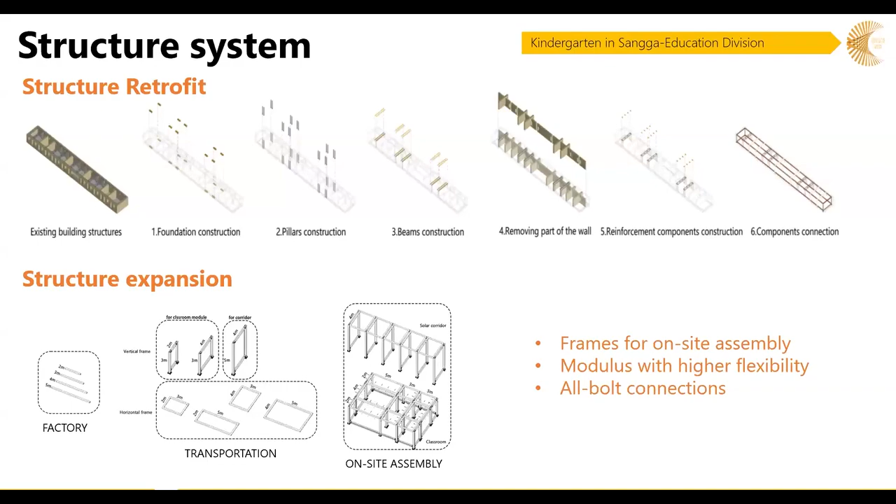For the reinforcement. Innovation is the theme of our new systems, considering the safety, efficiency, and upgrading demand of prefabricated parts.

Sorry, what is happening?

Okay, we decided to standardize prefabrication with both horizontal and vertical frames, with bolt connections placed linearly along the frames for less tolerance concern, higher construction speed, and upgrading support in the future.

The sewage treatment system is innovative based on the local conditions of Tibet. The system utilized a multi-layer biofilter due to the low air pressure in the Tibet Plateau. The artificial wetlands select local vegetation with higher capacity of sewage treatment.

HVAC system, lightings, and plugs are selected based on the principle of efficiency and economy, which is expected to have less load for the building. Here we featured an economical combination of air source heat pump, underfloor heating, radiator, and fresh air machines for the HVAC system, LED lightings for both interior and exterior space, and efficient plug machines.

Our envelope design is based on the existing condition. After site visit and simulation, we identified 5 key issues. The R value of the existing envelope is not even reaching the standard. Considering the problems we identified, our goals for the envelope can be elaborated into 4 points: renovation based on the existing building, use local materials, ensure the high performance of the envelope, and the envelope for a higher durability. Resiliency of the envelope is our primary concern.

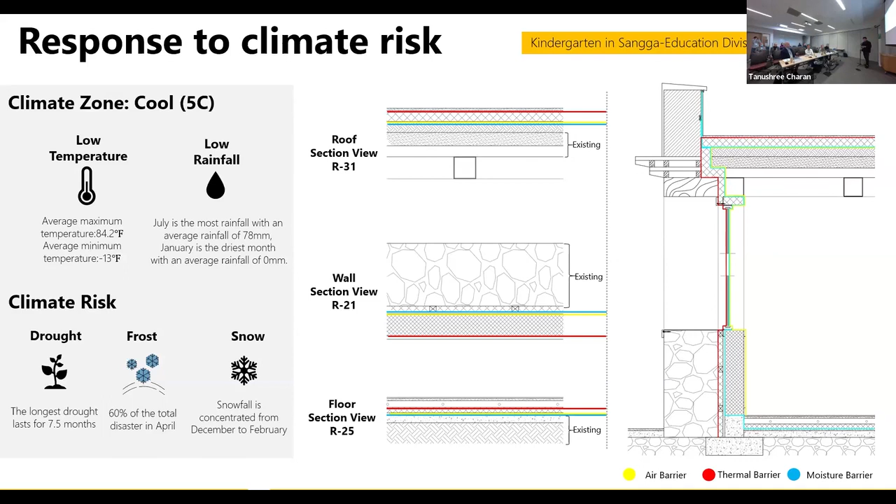Sangga is in climate zone 5C with the climate risks of drought, frost, and snow. Based on the existing envelope, we arranged air, thermal, and moisture barriers to ensure the envelope resists vapor, air leakage, and low temperature. In terms of material, the project proposes a hybrid utilization of straw as decoration board and insulation. This insulation can be both permanent and temporary on site.

Permanent straw insulation board can upgrade the insulation to R value of 21. For the temporary ones, we propose seasonal edible insulation bricks, which can become insulation in winter and feed livestock in summer.

Other than improving the existing envelope, the solar corridor is also important for the overall passive design of the building. For the envelope of the corridor, we proposed quadruple glazing glass. It's actually 2 pieces of glass plus 2 high-performance heat shielding films, which tremendously transform the thermal performance of the building.

Passive and active technologies both have much concern with the efficiency of the building. In this project, our design is conducted in a sequence so that the HVAC system will not overwhelmingly perform. We firstly prioritize the optimization of passive technologies for less energy loss. Then we have the HVAC system to compensate the energy loss and achieve comfort. And finally, the solar system to offset the energy consumption.

When we have the envelope system involved, the energy loss from the building is minimized. The EUI is lowered to 85.74 according to our calculations. We definitely want to use an HVAC system with technically the highest efficiency. However, in real perspective, the economic situation and resource availability always pose a handicap to design decisions.

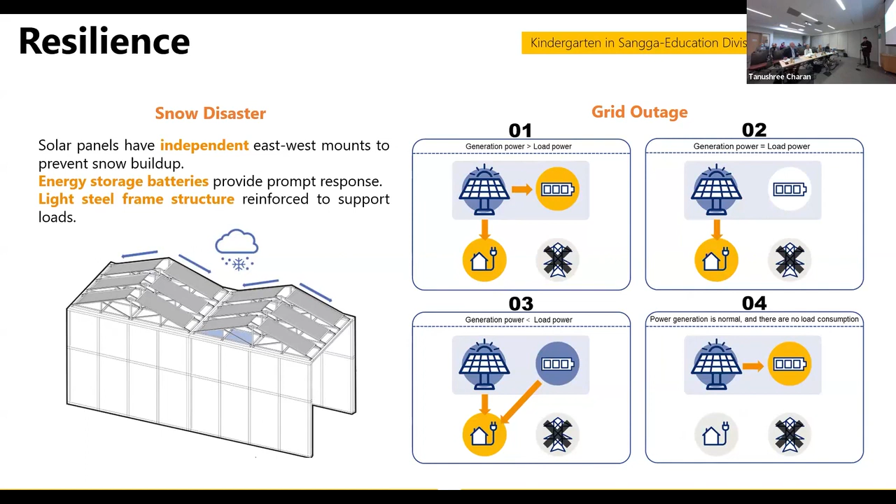To make sure the PV panels are safely and softly interacting with the load, the grid, and the batteries, we also developed a logic for the management of charging and discharging. Other than the use of clean energy, which has less carbon emission, a couple of design decisions we mentioned before all contribute to the reduction of carbon emissions.

After the calculation, we reached the result that embodied carbon emission has been lowered to 391, which has reached level A for the assessment. We consider the reduction of carbon through PV-generated electricity. We expect that in 7 years, the project is able to achieve carbon neutrality. We can say that we reduce carbon emissions to strive for the well-being of the environment.

But what are we doing for the well-being of occupants and community? Our comfort measures include the use of high-performance shielding films for light control, as well as the material selected for improved acoustic environments. Safety of water contributes to another health concern. The consideration for safety is in both the water supply and drainage.

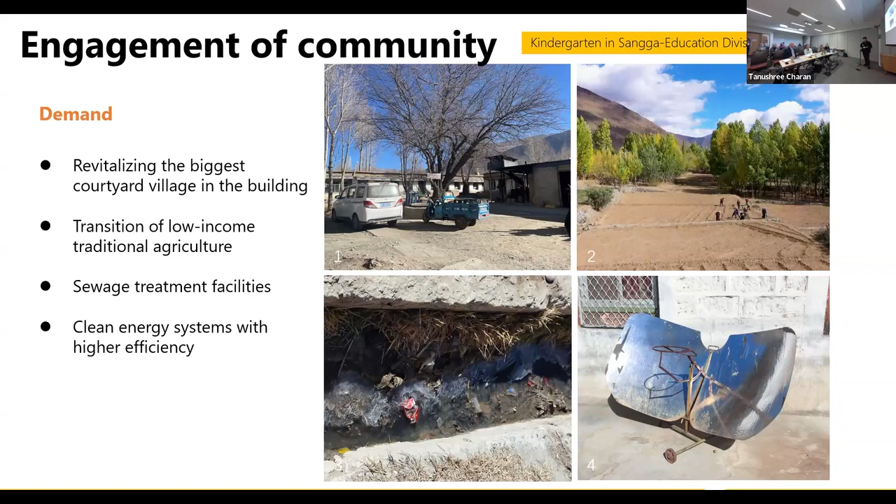For the well-being of Sangga community, we identify 4 demands that Sangga village is urgently needing. Rather than having the Koja building as a space privately tailored to kids and kindergarten staff, the kindergarten is expected to open to the members of Sangga community after school time and during holiday time. The comprehensive utilization of straws will help to transform the low-income traditional industry. The production of clean energy will be able to serve more surrounding families and facilities, which makes profit for the kindergarten facilities.

In terms of potential risks, noise and cooking fumes might be the risk as the project is implemented. Hence, the function layout is carefully arranged with the consideration of wind. Water pollution is a problem that Sangga village has had for a long time. As the Koja building is revitalized and the intensity goes up, we introduce a sewage treatment facility for the neighborhood.

Finally, let's go back to the start of the presentation. We understand that still a significant amount of villages like Sangga village are in urgent need of kindergarten construction and village revitalization. We proposed standardized prefabrication modules for buildability. The modules allow for further alteration for scalability, and we eventually expect this mode of kindergarten construction to be promoted to more traditional Koja buildings across Tibet.

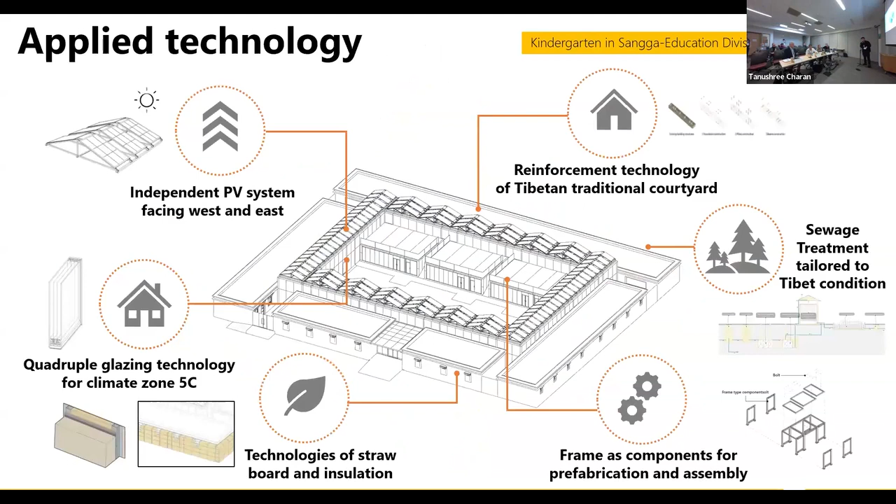But in this situation, we're just simulating that situation. And we found even in this one, it cannot generate more electricity than west and east. So our final decision is to use west and east for our PV panels. But don't you have plenty of roof space? I see lots of extra roof space that you could have put PV on.

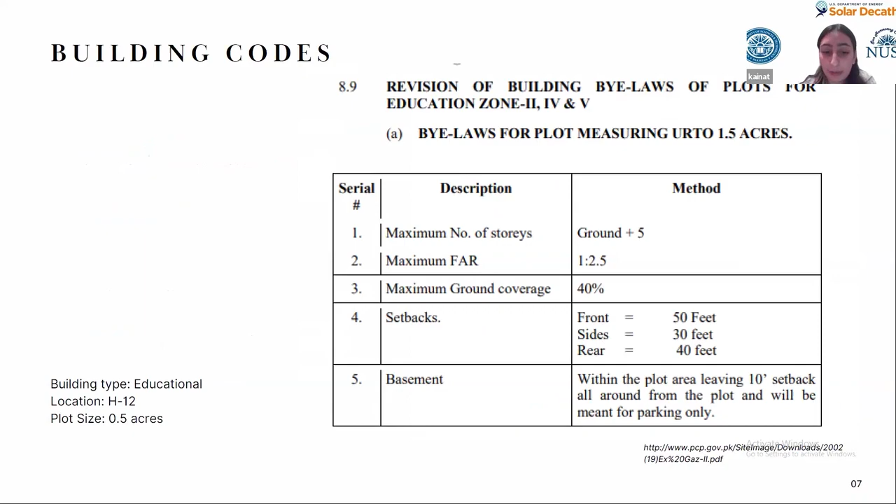Education should be more than just books and classrooms. Our retrofit project is guided by the belief in a balanced approach, blending nature with nurturing. By integrating sustainable design principles, we aim to create a healthier, more inspiring environment for students. We aim to reimagine education where nurture and nature coexist for students' well-being and environmental sustainability.

With classroom and circulation spaces dominating our two-story building, our focus lies on enhancing comfort and functionality. By addressing heating and cooling challenges, we aim to create conducive learning environments where students thrive.

Through thorough analysis, we have identified 5 major issues impacting our building. Our goal is to address these challenges and foster an enhanced educational environment. Now, to tackle the identified problems, we have developed practical design strategies focused on improving ventilation, creating social spaces, and reducing energy consumption, which will be elaborated as we progress.

Our first design strategy tackles the issue of dead corridors and focuses on revitalizing them. These neglected areas, marked in blue, offer significant potential for transformation. Additionally, the areas highlighted with red circles signify potential zones for air leakage due to louvers. Addressing these points is critical for improving energy efficiency and advancing our goal of a net zero carbon building.

Our corridors embody sustainability at its core, designed with a focus on 4 key principles. These spaces have been transformed into models of efficiency and connectivity.

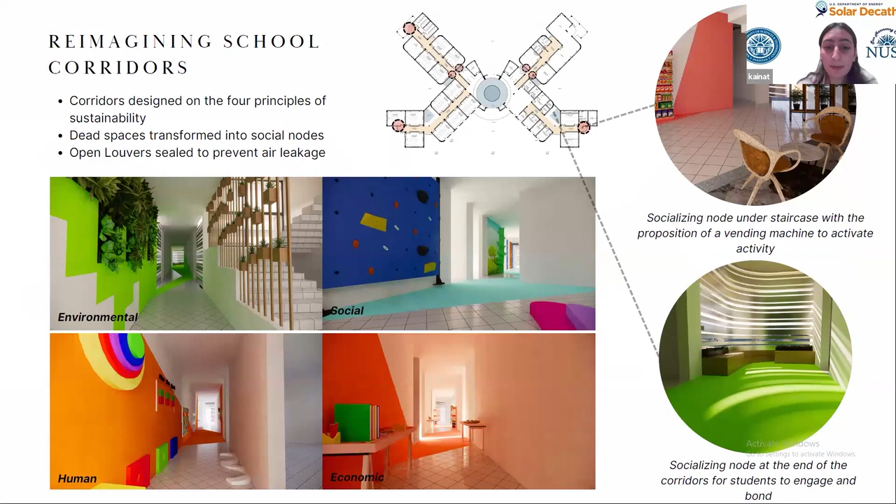Our next architecture intervention focuses on designing a green atrium, reimagining an underutilized central space. This revitalized area serves as a vibrant community space, fostering uninterrupted circulation for students while encouraging social interaction. The green atrium contributes to improved air quality, natural cooling, ventilation, noise reduction, and provides a much needed socializing space, enhancing overall learning experience for students and faculty.

Our next target for intervention is the roof, a significant contributor to heat buildup within the building. Following a user survey revealing notable temperature differences between floors, we propose 3 main interventions: solar panels, a roof garden, and a solar pavilion. The extensive roof garden offers a feasible solution, utilizing the otherwise unused space efficiently with its lightweight construction and minimal maintenance requirements.

The green roof system consists of multiple layers, including soil and vegetation. During the cooling season, it lowers peak indoor air temperatures by approximately 7 degrees Celsius.

Moreover, the playful roof covering doubles as the solar pavilion, housing glass paneled solar panels. The double roof structure with an air cavity in between facilitates natural ventilation, reducing reliance on mechanical systems and energy consumption. Material choice is recycled plastic lumber, which offers sustainability benefits in resource conservation, energy savings, and longevity. Its durability and resistance to environmental degradation make it a viable choice for outdoor pavilion, contributing to a more sustainable built environment. The next slide outlines our roof garden's technical aspects, focusing on cost effectiveness, ease of installation, strength, and durability.

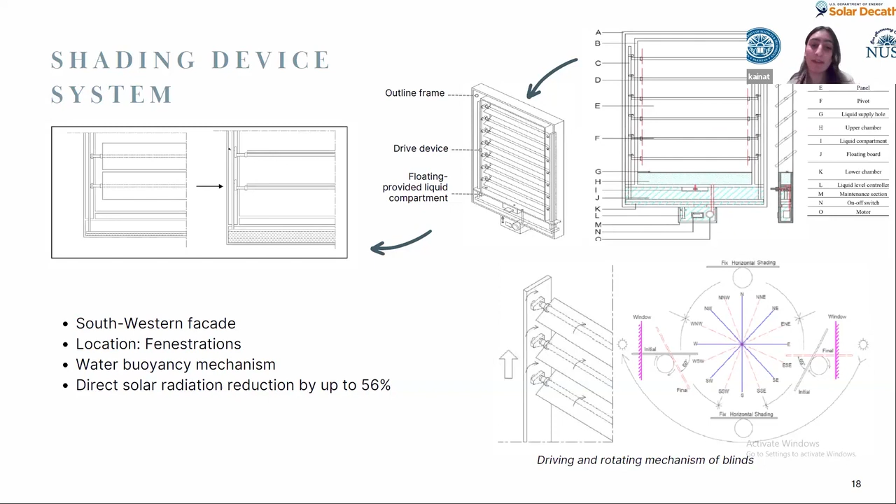Additionally, by referring to the reception of solar radiation to maximize daylight availability, we can achieve a quasi-optimized movement mechanism for the blind slats. This mechanism initiates the rotation of the blind slats through linked horizontal pivots exclusively driven by a buoyancy force. Our design showcases the driving and rotating mechanism of the panels in various directions, along with the detailed configuration and frame design to support the shading device.

We've assumed that the blind slats rotate from horizontal to vertical position every 6 hours during occupied hours. This strategic adjustment optimizes solar radiation reduction, particularly in the southeast and southwest orientation, resulting in an impressive 56% reduction rate. In cohesion with the application of infrared reflecting coatings on the windows to reflect back the IR part of the light for heat rejection purposes, it will contribute significantly to the reduction of heat gains.

Now the landscaping. Please, can you change the slide, Zaid?

Permeable pavers in the playground manage stormwater sustainability, reducing runoff and enhancing safety. They combat the urban heat island effect by cooling the area through water evaporation and improving water quality. These pavers enhance aesthetics and longevity, embodying an eco-conscious urban development approach.

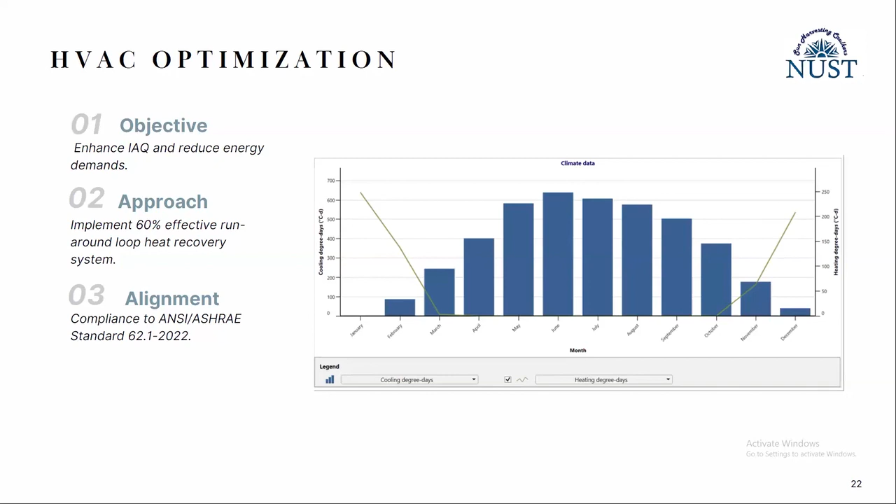A pivotal aspect of this initiative was the deployment of the cutting-edge heat recovery system. The decision to opt for a run-around heat recovery system over other options was driven by several compelling reasons. For example, the RACs offer lower utility payments and quick payback periods. Moreover, they boast benefits including lower energy consumption, reduced investment for heat generation and distribution.

What sets our selected heat recovery system apart is its advanced design, featuring a detailed separation of air streams. This design ensures that the outgoing and incoming air streams remain distinct, completely eliminating any possibility of cross-contamination. The HVAC implementation outcome shows a heat recovery efficiency of this system around 50 to 65%.

We set up an efficiency of 60% with the RETScreen software system. But we did not stop there. We took a proactive stance by implementing a dynamic scheduling approach for fan and ventilation control in the proposed phase.

This approach, tailored to occupancy patterns and space utilization within our building, optimizes energy usage without compromising on indoor air quality. Furthermore, with some additional cost, we made a switch to a better kind of coolant for our air conditioner. RETScreen facilitated our transition from HCFC 22 to HFC 32 refrigerant, offering immediate benefits.

For example, the global warming potential of HFC 32 is very low. HCFC 22 has a global warming potential of approximately 1810, which is a very huge value, while HFC 32 has a much lower global warming potential of around 675.

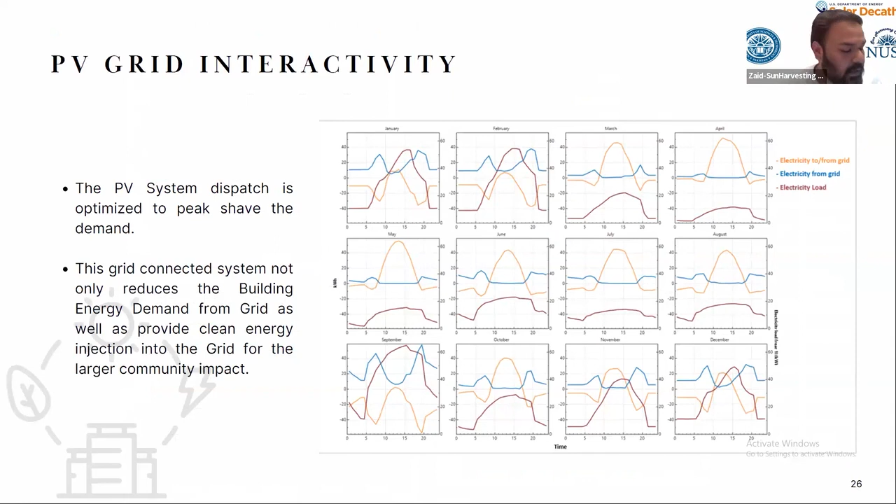Moving on, coming towards the carbon impact of our system, the environmental analysis was conducted using RETScreen software.

And a net operational reduction of 93% carbon emission has been calculated. I'll try to summarize it as far as I can. Coming towards the retrofitting cost, a total of $4,460 of retrofitting cost has been calculated for our retrofitted design, among which around 70% of the cost goes entirely to the solar PV system, then towards the solar pavilion, and even for the solar water heater, lighting and contingency.

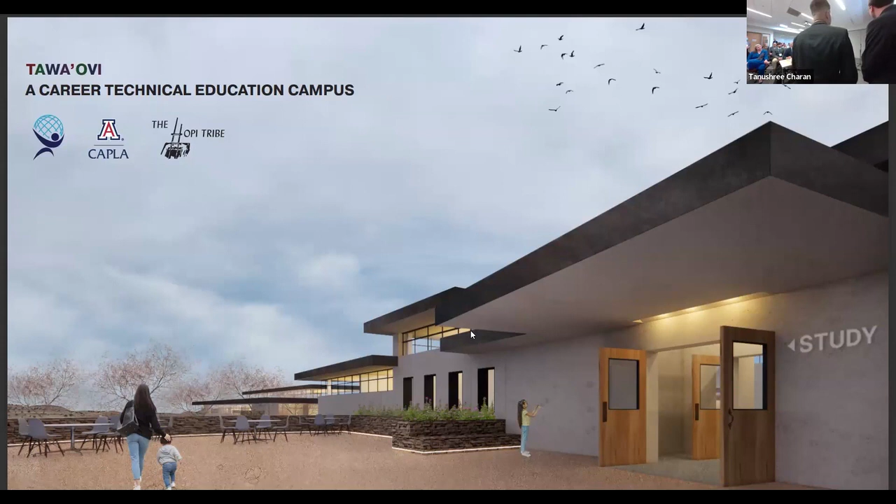Good morning, jurors. We're the University of Arizona's education team, and this is the Tawa'ovi Career Technical Education Campus. My name is Nikita. Christian.

In January of this year, the University of Arizona teams went up to the Hopi Reservation to meet with our client, the Hopi tribe. They had asked us to propose a potential design for a career technical education, or CTE, campus for grades 9 through 12 at their new Tawa'ovi community, which was completely off-grid. There, we met with local community leaders and our clients to get a better understanding of the vision they had for this project. One key advisor that has helped us throughout this entire project is Andrew. You might not be able to see him on that photo, but there he is in the back.

To give context, the Hopi Reservation is located on the Colorado Plateau of the Four Corners region, about equidistant from local cities such as Winslow, Flagstaff, and Durango. Our site is located on the north of the reservation, away from major population centers in First, Second, and Third Mesa. The reason is that our client, the Hopi tribal government, chose to build Tawa'ovi outside of clan-owned area. The blue area highlighted is clan-owned land. These lands are surrounded by historical major population centers that leaders have maintained for centuries. As this land is separate from the tribal government, the site was chosen to be built on the north of the reservation to preserve this culturally significant land.

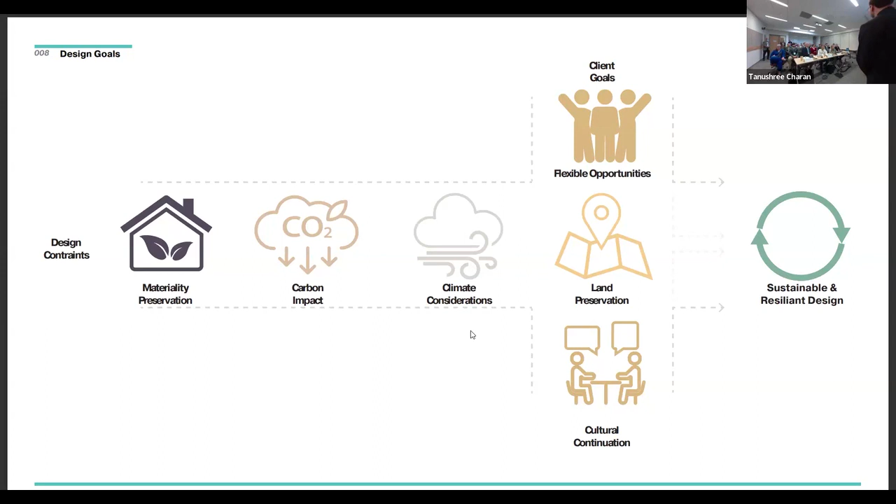However, we envision Tawa Ovi becoming a new city and cultural hub for the Hopi people. As the community develops, our 3 University of Arizona projects will become integrated into a larger master plan. Within the scope of the site, the campus is broken up into smaller buildings for the CTE campus with a primary focus on agriculture, culinary, veterinary, as well as metal and wood fabrication shops throughout.

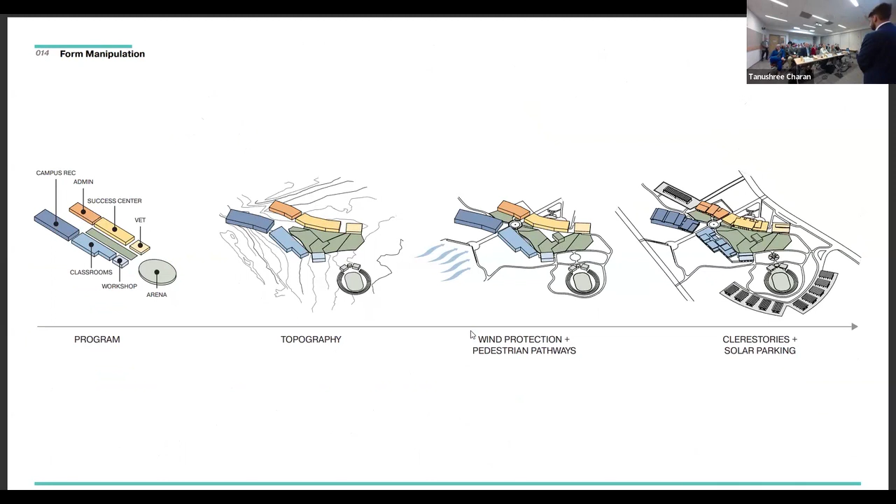The materials chosen for this project are commonly found in Hopi vernacular. The use of natural materials such as mass timber, clay-based plaster, and local sandstone help ground the project within its environment. We partnered with TimberAge Systems out of Durango for our prefabricated roof and wall assemblies.

They use wood from local Durango forests that had been harmed by mountain pine beetle infestation and would otherwise go to waste. These panels are made into CLT, shipped to Tawa Ovi, where we are able to have local workers and students learn new skills and develop the economy by learning to fabricate these prefabricated modules.

So these prefab panels are built particularly for the climate that we're responding to. The walls hold an R value of 53.82, while the roof panels hold a similar wall assembly. They have a thicker layer of added cellulose, bringing their R value to 71.8. And for our windows, we went with the PHIUS certified Alpen Tyrol series windows, and it was important for us to maintain PHIUS certification throughout the scope of this project to lower the overall campus energy consumption. And using these prefabricated panels ensures an airtight envelope with no thermal bridging.

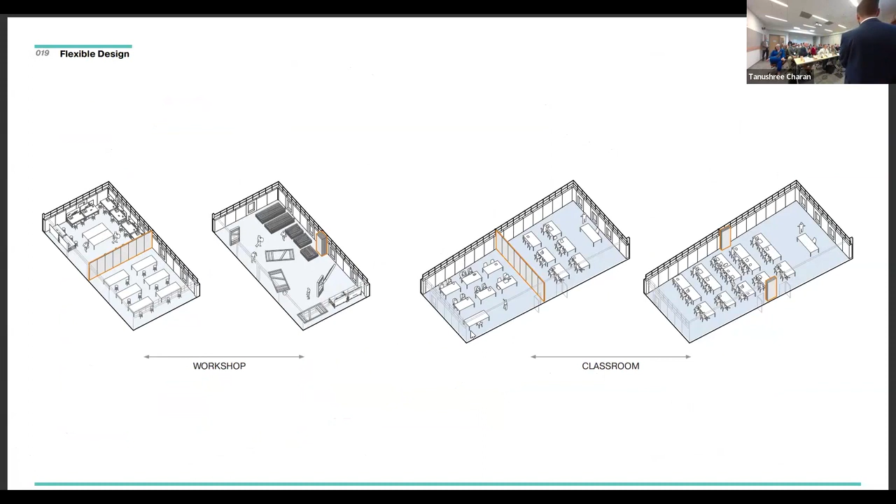And one of our other client goals that we were responding to was flexibility. Primarily with the workshop and classroom spaces, we incorporated a retractable interior wall to allow those spaces to expand or compress to accommodate a wide variety of activities. Here's an example of a double capacity classroom that has the operable wall open. This allows for a flexible learning opportunity.

So we're PHIUS Zero certified. How do we get there? Passively, we're going to have our systems set up with our air quality monitors, and how those work is they open and close our windows so that we can control how much heat is entering, and we can use the stack effect to clear out as much as possible.

Continuing from there, we've also done solar analysis. So we've shaped our roof so that during the summer, no radiant heat goes in, but during the winter, it reaches that back tiled wall, which functions as the thermal mass. That's being put there so that it can collect all that heat and slowly radiate it out throughout the day.

A key part of establishing resiliency in this project was through our water conservation system. In such a dry climate, water was essential to design. And through our terrace farming and roof drainage systems, we were able to collect nearly 150,000 gallons of rainwater annually. In addition, we can reuse 109,000 gallons of gray water to help irrigate our terrace farming and native vegetation on site.

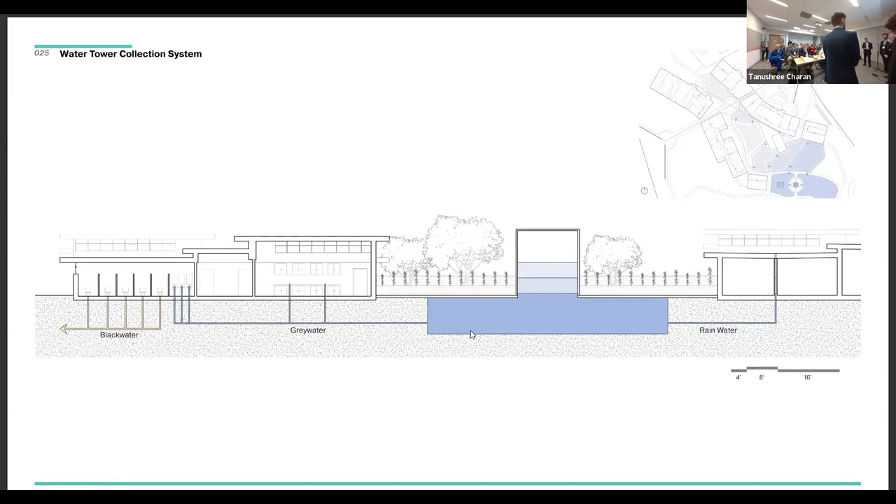When monsoon showers occur, rainwater flows from terrace to terrace, bringing our corn crops to life, and excess rainwater is then routed to the water collection tower. The water collection tower collects and filters gray water and rainwater. The water stored in the tower is used to irrigate the terrace farming and native vegetation on site, while black water is routed to a wastewater treatment facility.

Our building is also designed to work efficiently outside of school hours with a mechanical and electrical system that works through zones. It works in tandem with passive systems to heat, cool, and light spaces only when occupied. Additionally, we have a BAS that works with the school schedule to make sure that heating and cooling is routed effectively.

Effective air control is necessary in an environment prone to harsh, dusty prevailing winds. That's why we implemented an ERV system, as well as monitoring windows which work in unison to bring fresh air into the spaces while exhausting stale air, removing harmful pollutants in the classroom spaces. This better helps, and fresh air has been shown to improve attentiveness and cognition among students.

Considering our client goal for cultural continuation, the campus was designed with points of interest for the community to come along and interact with. The campus is programmed to provide for community needs, to help develop the economy, to establish cultural amenities, and create recreational areas. One such community engagement tool is the workshop, a focal point of this project, as it aims to empower the Hopi through hands-on learning. Participants can build, maintain, and engage in the construction process, fostering the skills and confidence needed to shape their own future.

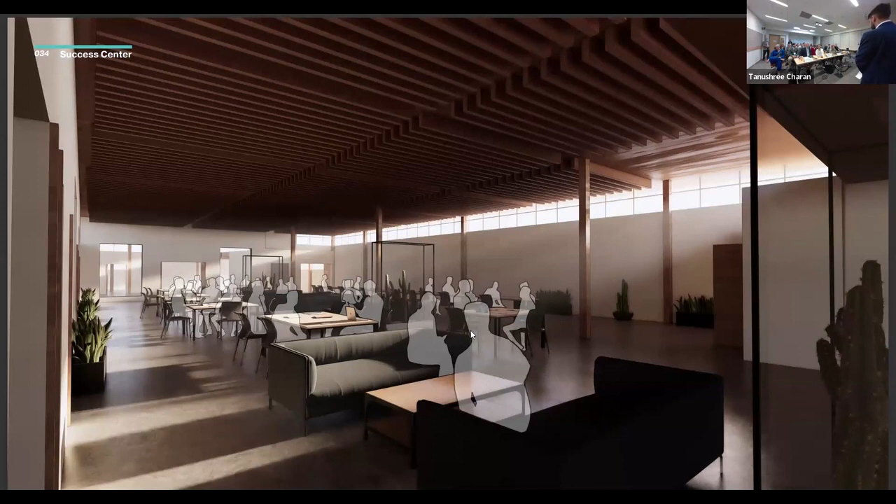The Success Center is a hub of productivity and social interactions. We try to balance the cultural preference of having dim lighting while still being effective at tasks, thus creating a welcoming environment for the Hopi. Bright daylighting was also important for the gymnasium, a vibrant center of sporting activities such as tennis and volleyball, and most importantly, basketball, which is historically relevant to the Hopi.

With off-grid in mind, we needed excess energy for peak loads during winter months such as December and January. With our photovoltaics, we're able to generate nearly 280,000 kilowatt-hours under ideal conditions. This means that we can offset even the most intensive loads during winter months. In addition,

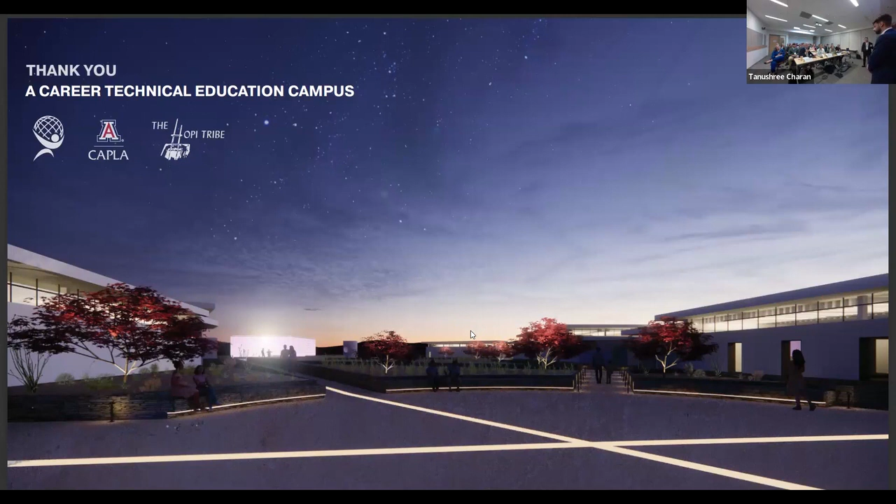Something that I forgot to mention on the photovoltaic side is we did run those calculations on if we'd be able to power each month, and we found that even during the highest peak months, basing it on the idea that the photovoltaics will only generate 40 to 60% of max capacity in winter months, we are offsetting loads with how much our PV are generating. And in addition to that, we do have the microgrid system working in cases where there's just too much peak load for this campus.

Other buildings and excess stored energy can offset any loads that we have here. I thought you were independent.

So to summarize everything, just so you're not confused, the whole entire system is off grid. It doesn't connect to anything. There's nothing there with the exception of a sewer line that currently exists, completely separate from anything else. It just currently exists and plans to be implemented into our project.

Okay, so back to the energy side. Yeah, I understand the confusion. So we have a Tawa Ovi microgrid. It's a DC island microgrid system that works only purely within Tawa Ovi. So we have a battery farm, we have photovoltaics from the campus, from other buildings.

That all powers— are there any other buildings than what we saw? It sounds like you've got a whole other community, but I only saw the two phases. This is phase one, which is what we're all building.

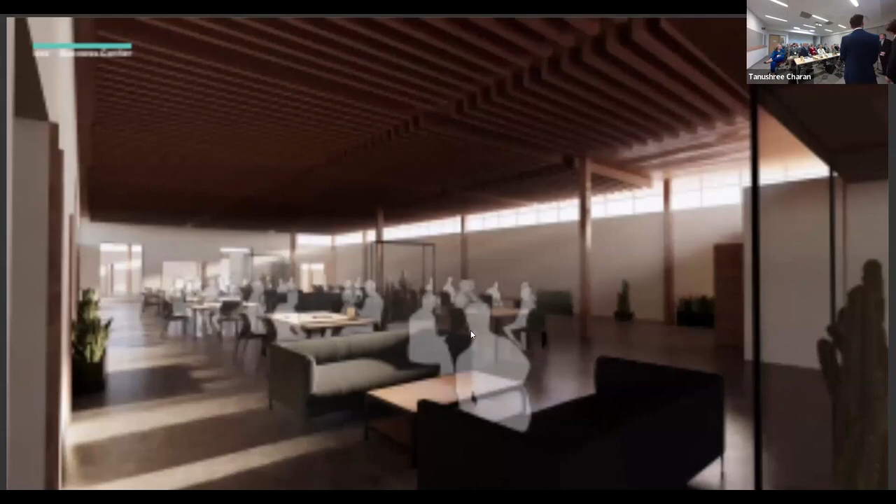If we go back to the daylight analysis, which I think is before this, I just wanted you to visually see it. So we used this primarily to study how light was currently working in the building, and then we adjusted it. There are spaces like the classrooms and the library where we want more natural soft light, so you can have desks that are lit up and comfortable spaces. But then you have community spaces, like the education center, where you want nice views in dimmer spaces, as they asked for. So we've been balancing the aesthetic and traditional needs they want with realistically how those spaces will function and what lighting conditions you'd want. Does that answer your question?

It does. Were the models themselves used for pragmatic study? Did you do casting analysis through them? The model is kind of the final step we took, because we did 3D models instead of physical models for these, so we could analyze the daylighting and everything. We initially wanted to build a couple of test models, but since we started the project in January, we've been very constrained on time. So we've been primarily focusing on our digital models, then just building physical models so you can understand the idea in person. So this is 90 days of work I'm looking at. Yes.

Okay, thank you. So for the CTE space, there could be considerations there for what the CTE program is, because that impacts the mechanical systems, ventilation requirements, and air changes necessary. Talk to me about how you dug into that. So the CTE space is our main classroom building. These are meant to be flexible spaces used for a variety of needs. They're general classroom spaces, each zoned separately, so that when, for example, there's an after school program, we make sure that space gets the full heating and lighting requirements it needs while the other spaces are off.

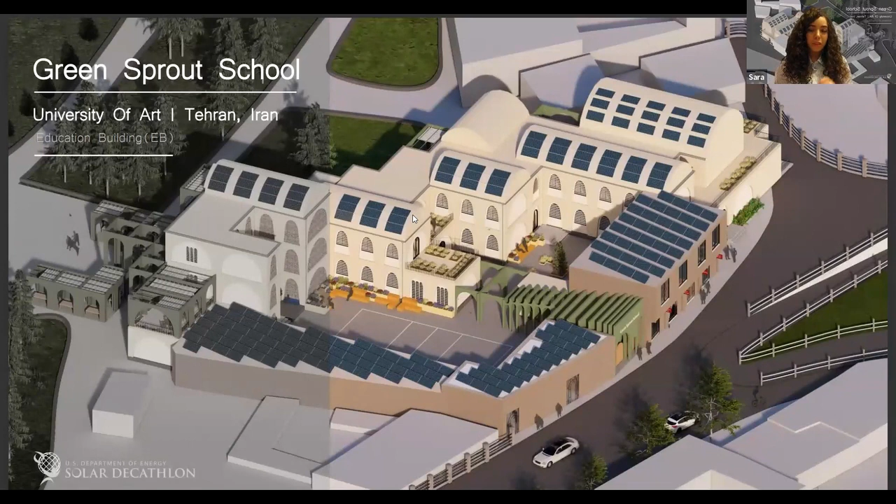Hello everybody, hello to the juries. We are the Green Sprout team from Tehran University of Arts.

We have come together to address social problems in a selected urban area. The four main objectives of our team in designing the Green Sprout School are reviving the social fabric, decreasing carbon emissions, increasing economic productivity, and resilience. To achieve our design goals, we utilized various software tools.

Site selection was one of the most important steps in our team's design process. Accordingly, the distressed social, economic, and cultural fabric of the Shush neighborhood in Tehran was chosen as the design context. In addition to social and economic considerations, climatic conditions, vegetation coverage, and natural hazards such as earthquakes were taken into account.

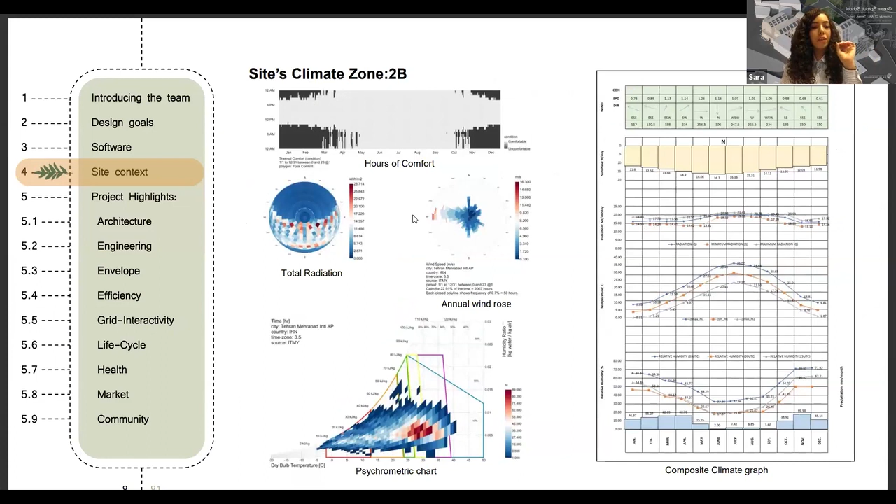As a starting point for the design process, a detailed climatic analysis of the site was conducted. Furthermore, interviews with inhabitants revealed the needs of the neighborhood.

One of the key objectives of designing a green school, which had a notable influence on architectural and educational aspects, was the revitalization of Iranian culture and art. To revive past architecture, the first step in architectural design was to divide the design into two parts: new construction and redesigning the existing buildings.

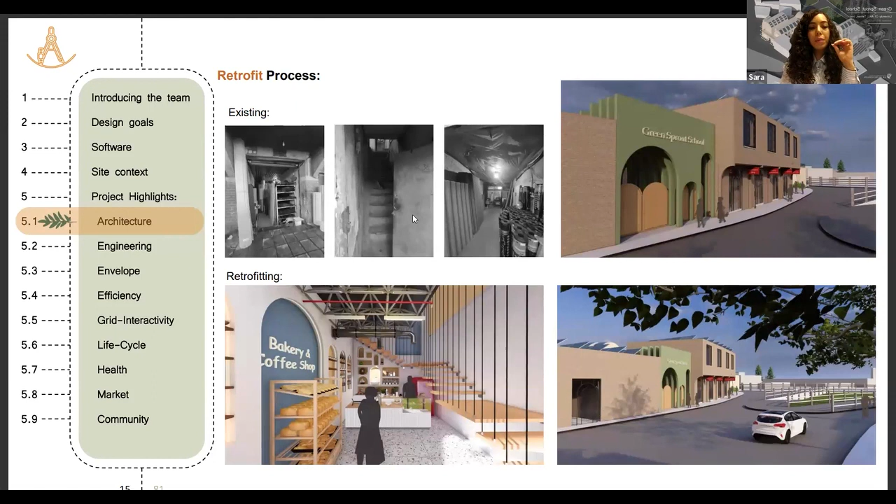It was decided to design a school as a neighborhood center. The new construction was designed modularly, incorporating elements such as Chahar Taghi, Avans, and central courtyards. By redesigning existing buildings and revitalizing them for new uses, the design team preserved about 68% of the existing buildings.

The design of interior spaces in proportion to the overall school design was inspired by Iranian architecture and culture.

I think I don't have access to slides.

The design of interior spaces in proportion to the overall school design was inspired by Iranian architecture and culture. Inspired by Chahar Taghi form and using modular design, the design team utilized second-hand scaffold pipes as the primary structure material.

The life cycle of second-hand steel pipes, with very low carbon consumption over their lifespan, simple construction, and the free form of architecture aligned with its cost effectiveness compared to alternative methods, was emphasized.

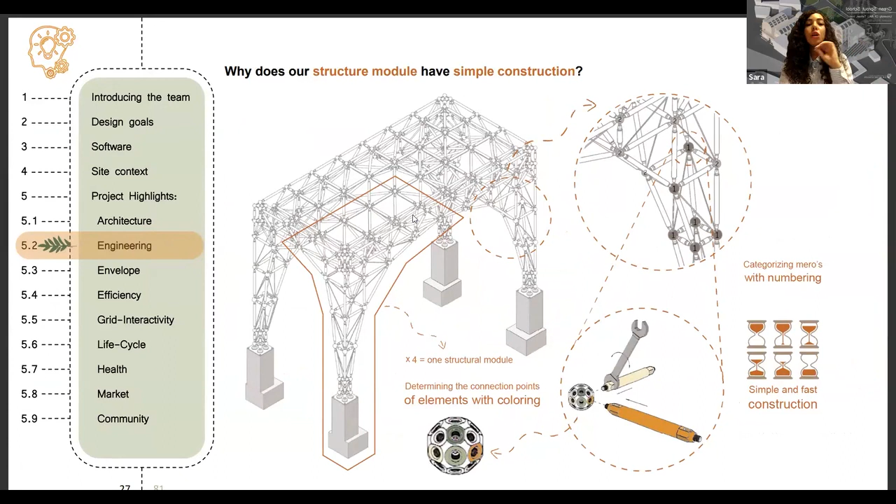To construct the mentioned modules, firstly by constructing one of the four module sections, other sections are easily constructed due to symmetry, and the module was quickly assembled.

To enhance earthquake resilience, the structural engineering team has proposed a space frame system. One module was fully analyzed in SAP software. The structural module has a very high degree of static indeterminacy, and the smallest repeating components that make up the structural module have geometric stability.

Integrated simulation of renewable energy production systems and transient HVAC systems was carried out in TRNSYS software. To provide cooling, heating, and domestic hot water load, compact air-cooled chillers, steel boilers, and their complementary equipment were used.

We use fire tube boilers for two reasons. First, heat pumps are not common in our country and are not produced domestically, so we are forced to buy foreign samples. Second, a large part of electricity production in our country relies on gas.

Air supply for cooling and heating through suitable ducts required careful consideration. The design team evenly distributed airflow throughout the space by considering two air zones and routing ducts through the structure. Renewable energy production on the building site was carried out using BIPVT, PV, air-based GHX, and water-based GHX systems.

Ensuring fire safety and greywater recycling in the building were meticulously addressed, similar to other utility sections. Detailed design aspects are presented in cross-section to better understand the installation of utility systems and renewable energy production.

Construction of the new building and retrofitting of the existing building was carried out using dry connections, effectively eliminating thermal bridges in every section. For redesigning the existing buildings, 68% of the structure was preserved, and with the addition of thermal insulation, new columns, and roofs, the existing building was structurally reinforced.

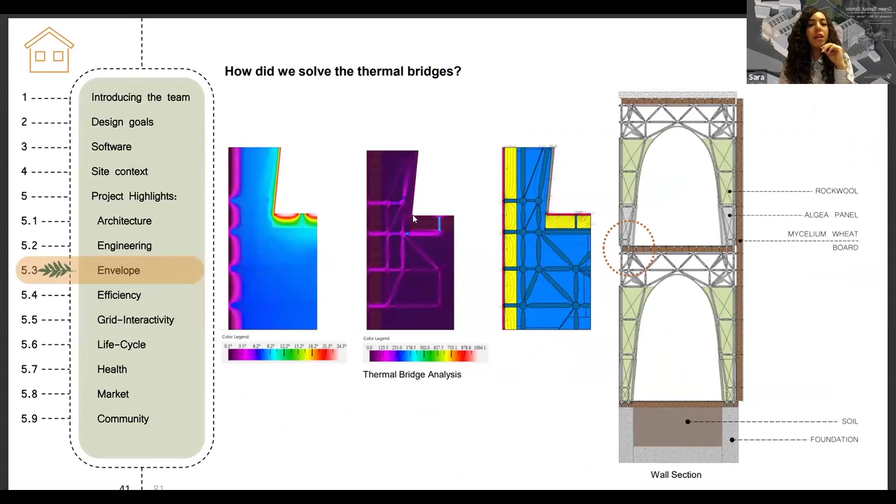The construction details of the building were analyzed using Therm software. The thermal specifications of the existing and new building envelopes were calculated and compared with Iranian National Building Code regulations.

In the first step, the energy consumption of the existing building was 610 kilowatt-hours per square meter. After designing the new building and retrofitting the existing part, the energy consumption reached 167 kilowatt-hours per square meter. Finally, with on-site energy production, the final energy consumption of Green Sprout School reached -11 kilowatt-hours per square meter. The renewable energy production systems across the entire site have a capacity of 178 kilowatt-hours per square meter.

Considering that a large portion of primary fuel in power plants around Tehran is natural gas, the engineering team decided to directly use gas for the boilers to avoid energy loss in converting gas to electricity at the power plant. It is worth mentioning that the selected boilers have an efficiency of 90%.

One of the most important effects of energy production and consumption is carbon emission, among which the share of carbon emission from renewable energy generating equipment is less than other sections. Rainwater collected on the building roof is directed to the courtyard by gutters.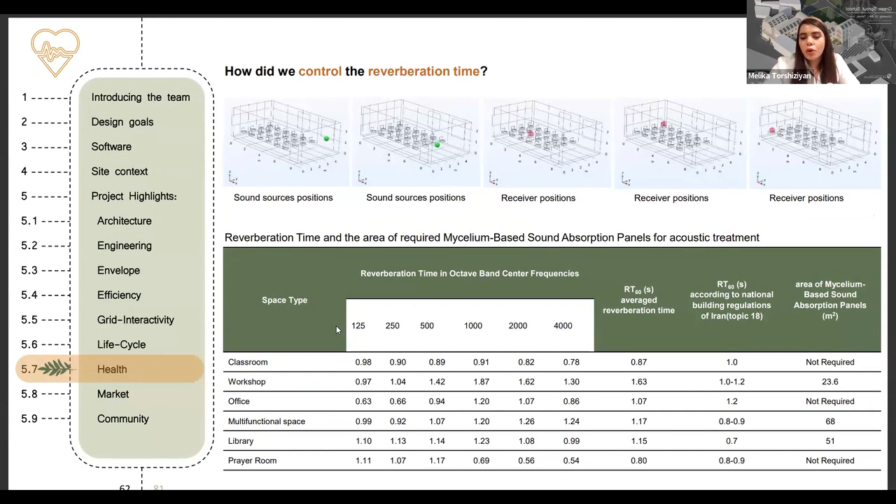By considering appropriate mass in building walls and using stone wool as sound absorbers in walls, sound transmission in the building is controlled to a satisfactory level. Another important acoustic parameter in a space was the reverberation time, which was controlled to an acceptable level by simulating its value. For example, reverberation for a classroom is 0.9 seconds at 500 Hertz.

The design team simulated lighting conditions using Climate Studio software to regulate the quality of light and use of natural light and achieve a 3-star rating according to LEED standards. Additionally, to distribute artificial lights uniformly in the classrooms and offices and provide illumination levels between 400 to 500 lux on the surface of tables, the conditions were analyzed by DIALux software.

To improve the economic conditions of the school students and neighborhood residents, the design team explored income-generating opportunities by renting commercial spaces to residents at prices lower than the market rate. This would enable students to receive discounts for purchasing educational supplies from school-owned shops using student bank cards, allow students to sell their artistic products and earn income, and provide communal spaces such as amphitheaters, libraries, as well as exhibition booths to the neighborhood residents.

By selecting appropriate construction methods, a suitable structural system, and precise scheduling, the design team was able to reduce the construction period of the school by 40% compared to a typical school. The construction cost of the new green building is estimated at $283.37 per square meter. This figure is $74 less than conventional schools in Tehran. To better understand the economic conditions, the design team calculated them in the risk analysis. It was determined after analysis that the construction cost of the school would be recovered over 12 years.

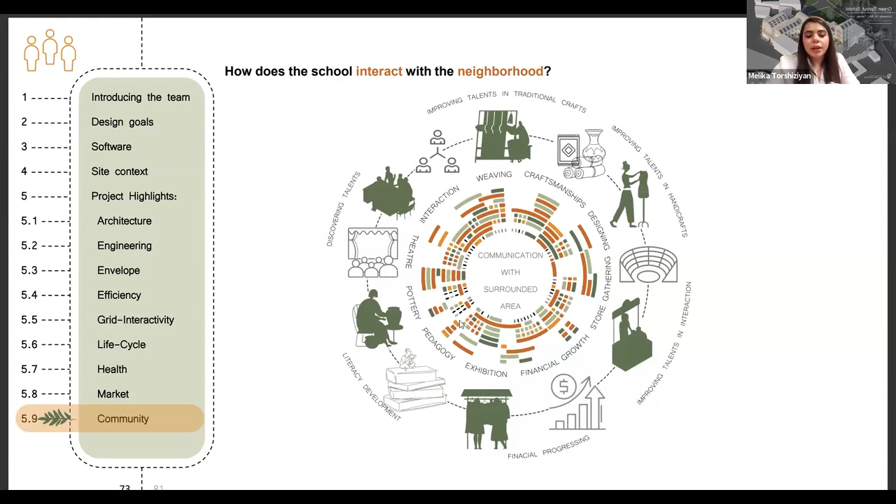By revitalizing commercial spaces, providing communal spaces for the neighborhood, organizing temporary exhibitions, and setting up sales booths for the neighborhood residents, the school will play an important role in connecting with its community and acting as a neighborhood hub. To strengthen the school's connection with the neighborhood, the Green Sprout School adopted a flexible scheduling program. And here is how the school interacts with the neighborhood: secure connection with the park, crime reduction, improving public culture, encouraging nightlife, longer working hours after school time, encouragement to read books, making the place suitable for women and families, and teaching skills to girl students.

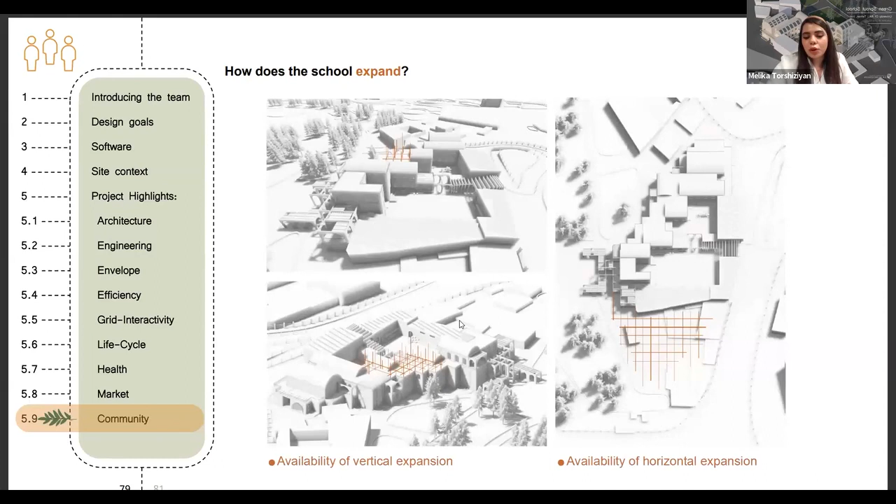Due to its modular nature, the school will be easily expandable in the future. The resilience of the Green Sprout School building is such that during crises and epidemics, it can serve as a haven for neighborhood residents in such situations. With rapid deployment, it can easily provide services to people seeking shelter.

Here are our project highlights. I'd like to thank our advisors and team. Thanks for your attention.

Thank you, Tehran University. Very well presented. Let's open it up for questions and answers. Over to the jurors.

I'd like to start with your ground heat exchanger, please. Could you just tell me a little bit more about why you chose a horizontal loop field, where it's actually located on the site? If you explored having the correct amount of room and all of the modeling associated with balancing it. And then finally on that, did you look into the thermal conductivity of the geology of the site? I know that there's a bunch of questions there, but just maybe hit a couple of those that you think are the most interesting in your exploration.

Actually, would you mind repeating your question? I'm not sure they heard it. Sure. Okay, so I want to talk about the ground loop heat exchanger, and I want to understand a few more of the details. I'm going to give you an option to explore some of them, but you don't have to talk on them all. One, why did you choose horizontal? Where is it located on the site? Did you explore the thermal conductivity of the geology? And is it fully balanced in order to account for all of the heating load?

Yes. PV is only used for generating electricity. So we used charge controllers and batteries to store this electricity. But when the battery is full and the school doesn't need any electricity, the produced electricity is sent directly to the grid. Understood.

There was mention in your narrative of something about algae panels. Can you talk about that a little bit? Yes, the algae panel is made from algae collected from the river or dam or something like that, brought to our site, shaped and formed, and it dries because of the solar radiation. The hardness, according to Shore D test, is about 60, something like that.

And compressive strength of the algae is about 3 MPa, and tensile strength of the material is about 7 MPa. And something like... Your screen seems to be frozen.

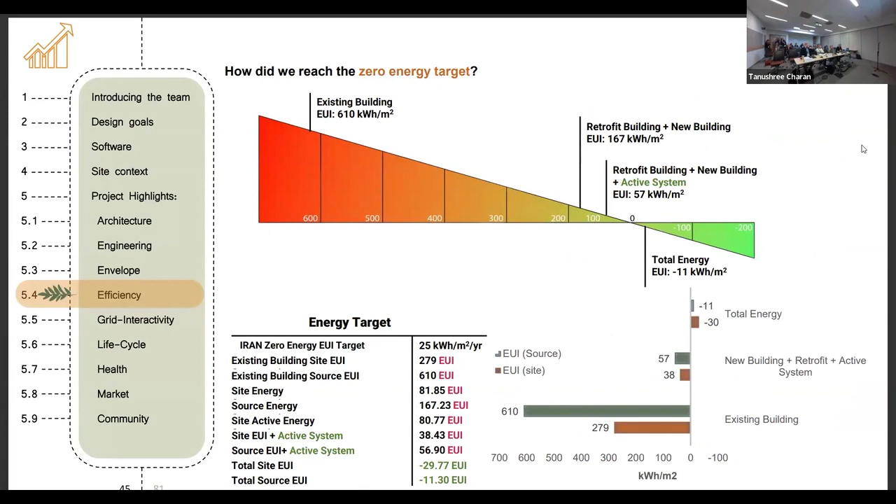And the algae panels are only used to a certain level, and then it moved to spun rock wool insulation, and then I don't know what was happening above that. We didn't use the algae panel as a thermal insulation. We just use this as a covering, floor or facade.

For thermal insulation, we use mycelium waste, which is first gathered from the farms of wheat and sent to our site, and then made into mycelium and dried by using microwave or something like that. And then we assemble these types of insulation to drywall or flooring or something like that.

I might have missed it, but you talked about the water collection and storage system. Can you describe the plumbing system of your building? Yes, we gather the water, rainwater from the roof or outside under the earth. Actually, the earth acts as a drainage and captures the dust of the rainwater, and then it's stored in the reservoir, which we bury in the earth in the site of the school, and then using a pump the gathered water goes to the

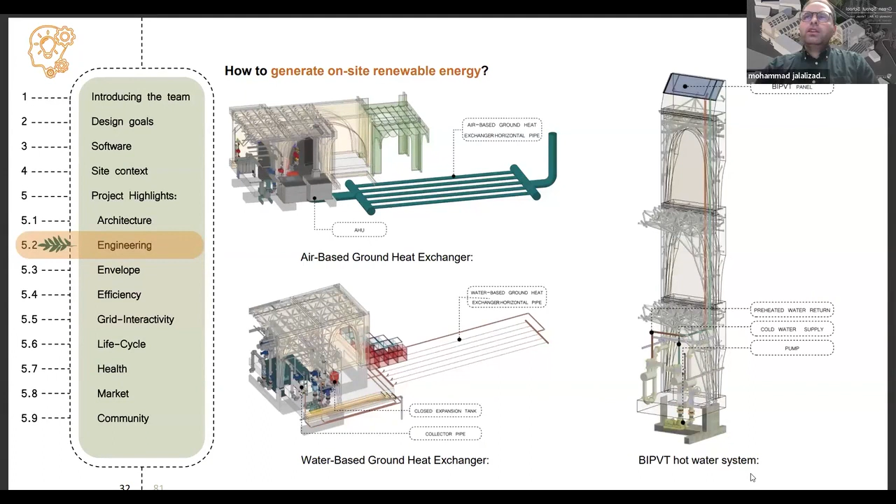Yes. The gray water is first gathered in the main mechanical room and purified and will be used for irrigation and toilet flush tanks. Another water we gather is condensed water from AHU systems. We use this type of water for filling flush tanks and something like that.

I think we have time for one more question from the jurors, if there's any. Thank you so much. One more? Okay. There was a commitment to using what you described as Chahartaqi design and construction for this project. The arched forms seem to take up a lot of space, but they also offer the opportunity to increase insulation, route systems, etc. Were there other thoughts of a simplified system without so many small parts to more quickly achieve these space goals?

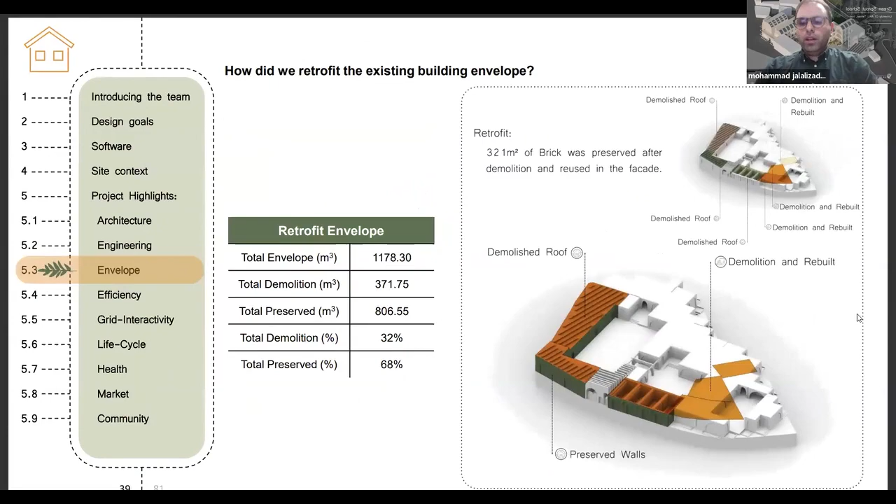In our country, we don't have carbonless material like OSB woods and something like that. The concrete system and metal systems have a lot of carbon emission. So we want to solve this problem by using a second-hand scaffold system in the form of chahartaqi. These types of forms, because of special characteristics in the form of curves relative to the envelope and volume of the shape, reduce the thermal conductivity between the inside and outside. There is no solution for this because the other types of material have a lot of carbon emission.

Another point is that when we use curve forms structurally, the structural system is lighter than when we use slab systems. Another point is that we use these curve forms as a part of energy systems by assembling BIPVT systems on the roofs and on the curves, and also we revive our ancient architectural forms whose characteristics we lost over the years. Something like that.

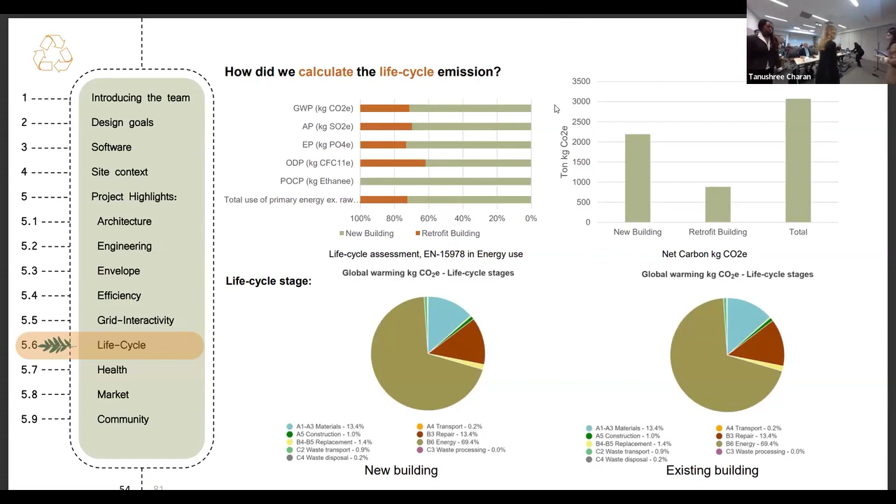Next up, we have University of Illinois, Urbana-Champaign. Can I request all the presenters to please come up front? Just a heads up, as you speak, the microphone is there, so you either need to share or walk over. All right, where's the remote to change slides? And also there's a camera right there, so try not to block it.

All right, UIUC, you may now start your presentation. Good morning. We're Illinois Solar Decathlon, and we're excited to present Ideals, our vision for the future of education in Chicago. Here's a brief overview of our team members, presenters, faculty advisors, and industry partners who all partook in the making of this project. Our site is located in the northwest corner of the University of Illinois at Chicago, our main project partner. The site is uniquely accessible through all modes of public and private transportation from Chicago's west and south sides.

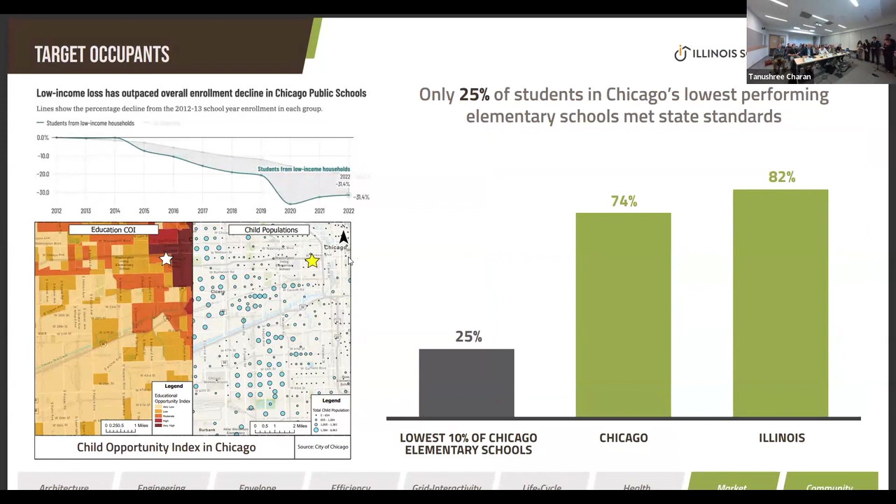Ideals seeks to establish an ultra-sustainable model for schools and is catered toward Chicago's most underprivileged populations, whose relationship with the Chicago public school system has been marred with a legacy of systemic discrimination and lack of opportunity. In order to enable this form of social and environmental justice, Ideals aims to provide an early educational intervention to its K-8 students. It aims to rekindle trust between the CPS system and Chicago's most vulnerable communities, who principally reside on Chicago's west and south sides. Additionally, it addresses a legacy of displacement that the construction of UIC's Circle campus unfortunately bears.

The main climate characteristics that Ideals is catered to are Climate Zone 5A's polarized seasons, high humidity, and high precipitation. Though we're outside the FEMA 500-year flood hazard zone, the building also accounts for extreme natural hazard events that are occurring in Chicago, particularly tornadoes. Our design goals are tailored towards enabling forward-looking pedagogical methods in extremely healthy and equitable learning environments. We see Ideals as a learning asset both in form and function, which is why our cutting-edge design strategies and technologies are made extremely and intentionally visible, as well as coherent to all of its occupants.

We align our massing to be suitable for passive building performance. By doing so, we place the classrooms on the outer perimeter of our building, which are then anchored by 3 central courtyards, all maximizing natural daylight. In this, we keep a heat loss factor of 1.9 and a surface to volume ratio of 1.2, greatly reducing the thermal loads. Our site has a 616% increase in greenscape, alleviating the heat island effect and promoting healthy and resilient spaces.

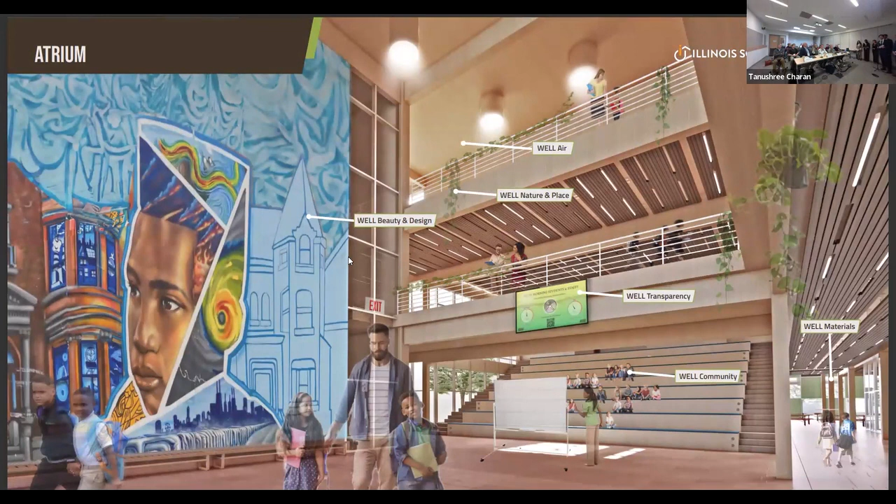In collaboration with UIC, Ideals establishes spaces that lend themselves to new cutting-edge learning methods through creating flexible and innovative learning spaces. Our Learning Commons highlights unique forms that encourage movement and openness. As for many of our spaces, we design for LEED and WELL standards, such as ways to optimize daylighting and acoustical performance. Our Innovation Lab is another high-tech space showcasing and integrating the most recent learning methods to introduce students to technical projects with a sustainability-centered curriculum.

The courtyard begins to highlight Ideals' commitment to nature and place without compromising on building performance. We use skylights that are operable and electrochromic, as well as being triple glazed with a low-E coating and a krypton gas fill. We use windows with warm edge spacers to minimize the heat loss factor and also to allow for ample sunlight and natural ventilation throughout the building.

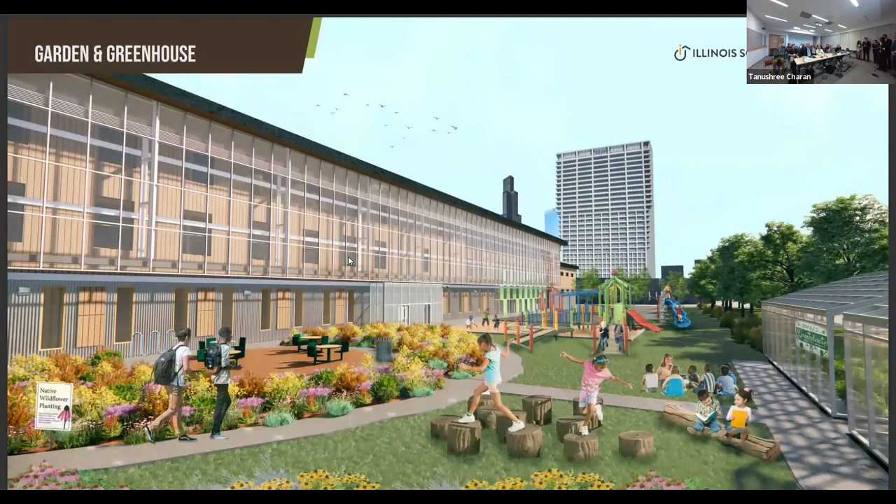We have 2 courtyards that create internal spaces that are going to be beautiful and accessible year-round, with greenery that supports the natural sites and the internal air quality. The new landscaping also features a greenhouse and a native plant garden, along with an active playground and paths that connect the whole space. This allows for outdoor education as well as creating more resilience on the site.

The vertical fin shading that we incorporated on the north and west facades plays an aesthetic role to interact with UIC's brutalist legacy along the campus. The vertical pattern emerges as a constant motif throughout our site. Similar to other contemporary buildings, we create an homage yet a clear break, acknowledging the past, but addressing what we must overcome in order to develop a more sustainable and equitable future for students. The kinetic shading is made of recycled aluminum and offers Ideals its main exterior identity. It also provides adaptive afternoon shading, which is really necessary because we have an extreme cooling demand that we want to reduce throughout the year.

We also use a double skin facade along the south face, which is a really well-performing element of our design. This highlights, through the THERM and WUFI models, our thermal, moisture, and humidity performance, which is all crucial to our 5A climate conditions. To validate this, we ran Autodesk CFD simulations on the double skin facade, which showed the workings of the stack effect, massively helping in the thermal regulation and natural ventilation of the building.

The cafeteria is not only a comfortable, vibrant space for healthy nourishment and mindful waste management, but also a site for renewable tech education, as the algae facade and the kinetic floor tiles are shown. Together, they annually contribute to around 2 kBTU per square feet.

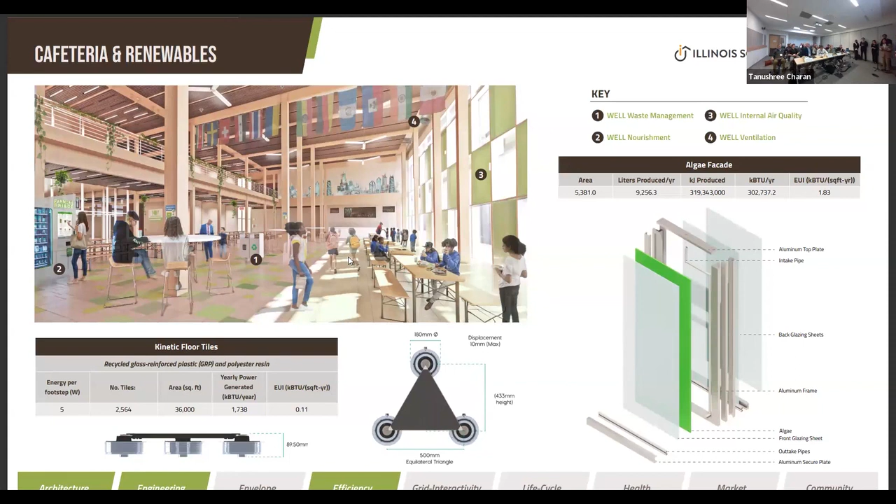Ideals also utilizes triple glazed PV windows with a PV silicon crystalline layer between 2 layers of glass, alongside low E coating and a noble gas infill. With a 24% average window to wall ratio, the distribution of windows along each facade is optimized to maximize production without compromising fenestration. With 16% efficiency, PV windows impressively contribute to 6.4 kBTU per square feet yearly, with the distribution across each month and each facade as shown.

Ideals' east-west orientation and flat roof make it optimal for roof-mounted PV performance. Using 650 south-facing First Solar thin film cadmium telluride arrays at 19% efficiency and 34 degrees optimal full tilt, alongside 3 Schneider Electric mode inverters with 98% efficiency, PV roof arrays contribute around 11 kBTU per square feet to Ideals' annual production.

Our Purple Roof system achieves 100% stormwater management on site by providing rainwater detention and retention superior to traditional green roof systems. It also enhances the efficiency of our PV panels through its thermal regulation capabilities. And with an R70 rating, the extra moisture and vapor layers preserve optimal performance.

Ideals aims to provide 100% irrigation supply through recycled rainwater, gray water, and black water, while also employing a dual wastewater heat recovery system, which satisfies 100% of the building's hot water demand. 2 separate paths are created for the gray water and black water, ensuring sanitary delivery to their respective Piranha wastewater heat recovery systems. And then they both undergo proper filtration and distribution into our drip line irrigation network.

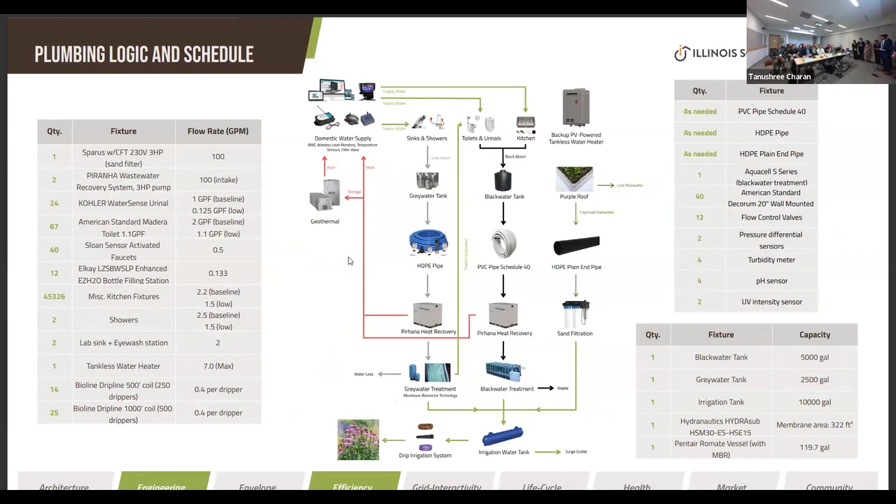30% of the gray water is recycled back into our black water channels, while still recycling enough gray water to satisfy 100% of the building's irrigation demands.

Integrated with our Piranha system is our geothermal system, sized to manage 100% of our heating and cooling loads for the building. In collaboration with Professor Andrew Stumpf, developer of the GLHE Pro software, we were able to utilize the software as well as market analysis data in order to determine that the Climate Master heat pump in a 4x5 configuration of 20 boreholes with a 440-foot depth was optimal in both cost and function.

Integrated with the geothermal system and the Piranha system, and to increase efficiency even further, a combination of the VRF and DOAS units was utilized for ventilation and HVAC solutions to provide efficient, personalized thermal comfort regulation and optimum ventilation throughout the entire space. In addition, we install occupancy, thermal, and indoor air quality sensors utilizing LiDAR technology, all connecting to our central BMS unit. This helps regulate and optimize the air quality essential to a healthy learning environment.

A demonstration of the layout of the ventilation and the various indoor local units shows the utility of the VRF unit in being tailorable to each specific space. This helps optimize between the load management and the initial cost.

The full circuit logic of our HVAC system and all its components are designed to be complementary to one another, as each system improves the efficiency of the other. For example, the Piranha system helps regulate the fluid temperature within the geothermal system, which thus helps improve the geothermal system's efficiency and operation. This theme of integrating different systems within each other to maximize efficiency helps improve the entire system's operations.

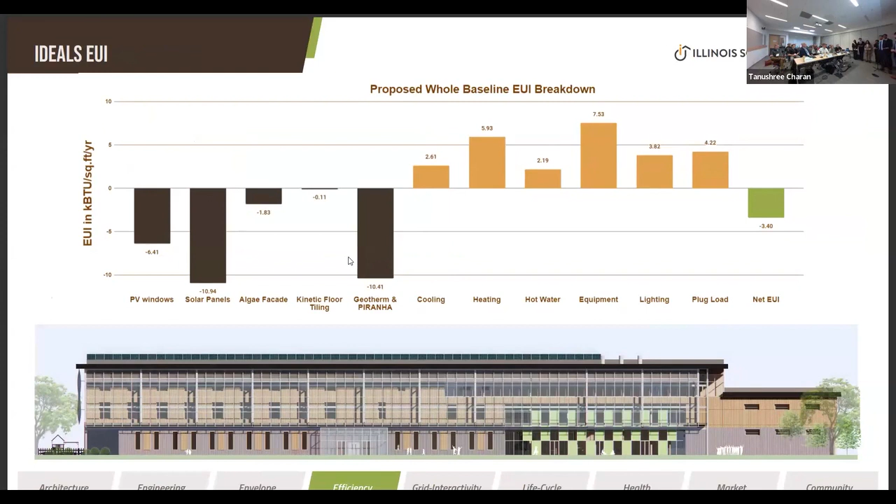Finally, the building is projected to have a negative net annual EUI of 3.4 kBTU per square foot, which totals around 580,000 kBTU in excess energy per year. Ideals pioneers peer-to-peer energy trading with blockchain technology, enabling prosumers to sell excess energy to neighboring buildings through automated smart contracts and discounted prices, enhancing microgrid economic viability.

Our AI software by TM Beer and Associates dynamically adjusts HVAC, lighting, and equipment based on occupancy patterns, weather forecasts, and energy usage data. With up to 90% accuracy in real-time consumption forecasting, it optimizes energy usage and storage, reducing peak demand charges and enhancing energy independence.

We also integrate 12-meter electric buses featuring static wireless charging, 220 kilowatt electric motors, and regenerative braking for maximum efficiency and range, as demonstrated in the microgrid. In worst-case scenarios, during grid disruptions, our 1,200 kilowatt lithium iron phosphate battery with an 83% load coverage factor sustains operations for 8 hours, ensuring uninterrupted service. The decentralized microgrid, empowered by the AI system, dynamically prioritizes peak shaving and frequency regulation, reducing reliance on the grid.

As shown in our SDA analysis, Ideals achieves an impressive daylight infiltration. We used Relux CAD to model each of our core spaces, integrating ambient lighting sensors as well as daylighting sensors. The spaces are lit using solely artificial lighting or a combination of artificial lighting and daylighting, creating fine-tuned, comfortable lighting levels at all times. Alongside our shading system, we managed to mitigate glare in all the spaces, creating soothing lighting levels at all times and with peak efficiency.

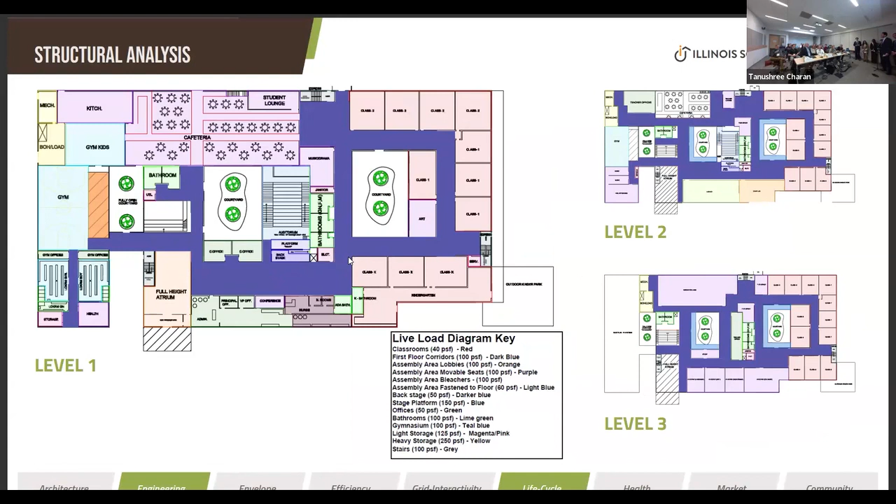The live load diagrams for each floor are demonstrated as follows, and they're all in accordance with the International Building Code of 2021. The SAP 2000 model that shows the controlling load cases shows vertical and lateral deflections less than 1.5 inches, which is remarkable serviceability.

For us, we wanted to prioritize this space being a safe haven for community members during extreme hazard risk events, and we have thoroughly examined its capability to do so through our structural design.

Ideal's conscious utilization of heavily recycled and recyclable materials reduces its cradle-to-grave carbon emissions cost to 137 kilograms of CO2 emitted per meter squared, which is a testament to its resilience. Moreover, a maintenance plan developed alongside UIUC's Planning, Sustainability, and Project Management team, who already have extensive experience maintaining geothermal, PV, and advanced renewable systems on campus, will ensure enhanced energy efficiency and performance across a longer lifespan.

Our team developed an Ideals application, recently approved by the App Store and going live tonight, which aims to cement the building's identity as a sustainability lab. It is integral to the school's security system and also allows users to access schedules, events, receive communiques, and importantly, monitor the building's energy performance and delve further into understanding the renewable systems that maintain net zero operability, making it a vital tool for sustainable education within Ideals.

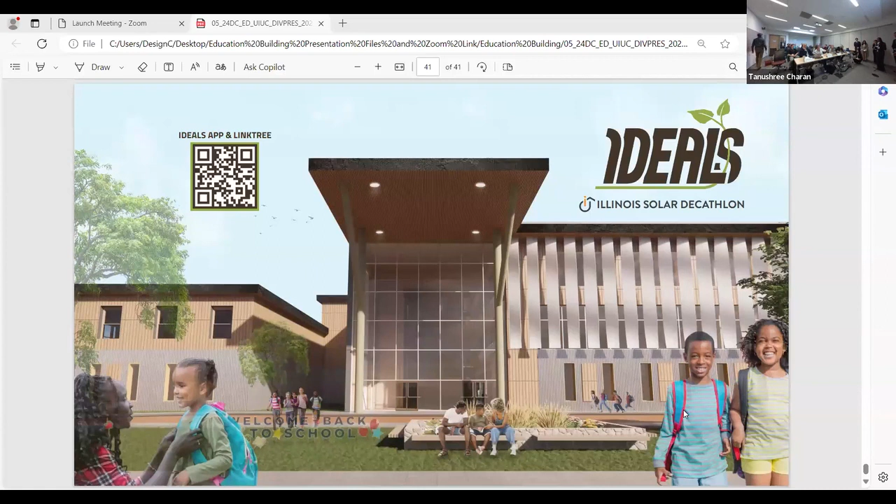So in the summer, how are you keeping from overheating? In the winter it's great, but maybe the answer is the energy balance - you get so much heat in the winter that it's worth overheating the atrium in the summer. But that atrium is going to get blasting hot potentially in the summer.

We also made sure that the windows, the skylights, are operable as well and connected to our BMS system, so we could open the space up to create airflow. But then also we know that the average school year doesn't really go into the time that it would be that hot.

We can do one more question.

Thinking about operations and maintenance and life cycle and replacements, it seemed like that section in your narrative was a little short. So knowing that these buildings have life cycles with their systems, tell me what you did explore and maybe didn't make it into the narrative.

We looked at especially the more unique ones like the algae facade - we were researching how they actually get maintained and what cycles they would go through. For PV long-term efficiency, we weren't able to delve as far as we would have wanted to, just because of time constraints. But with the PSPM's guidance, we mainly got some idea of how long the replacement cycles would be, and estimates of it are relatively factored into the market analysis cost as well.

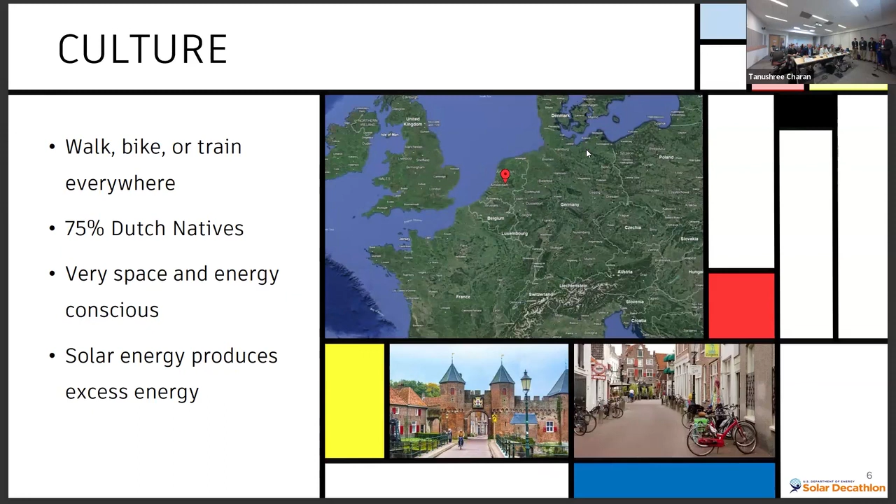Through this energy storage, we considered a multitude of options: first batteries, then gravity, thermal options, molten salt, and CO2. We looked at all the pros and cons of these different types of energy storage and decided what would be best specifically for our site and for the school as a whole.

This image is an overview of the area in Amersfoort where the 4 UC buildings in the Solar Decathlon live. Our student Maeve will take a 15-minute train ride from Utrecht and then a 10-minute walk to our educational building site.

For the general mass of the building, we started with a big box and split that box into an academic and public side. Then we modified the public side to introduce a walkway from the train station right into the main entrance of the school, the academic side. With our required square footage for each space, we stretched and pulled that building to meet those required sizes, then tilted all the roofs to maximize solar gain wherever we could. Last, we connected the academic and public side by a sky bridge.

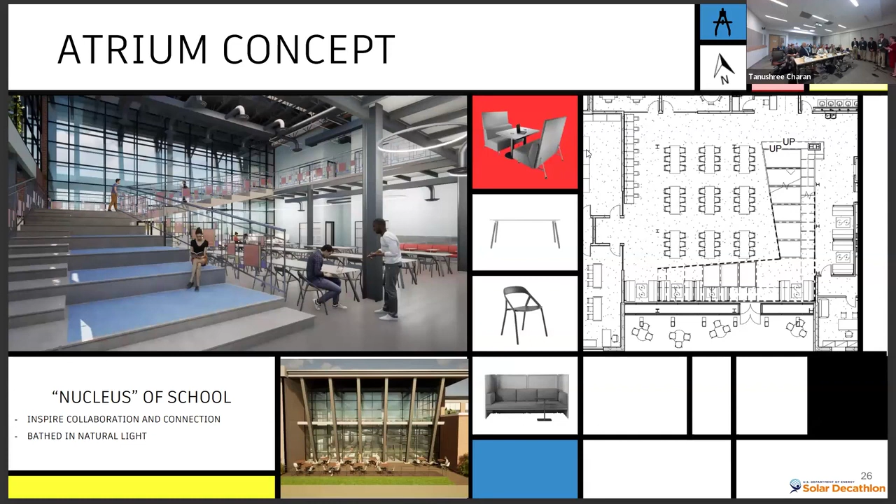It is a great social space for students to meet before and between classes. It is also the space for lunch. So after her first morning classes, she would come there to eat as well and socialize. There are both tables for lunch and stuff, as well as the seating along the stairs. This is meant to be a large social space for all of the students.

So Maeve in particular, as well as some other students in her classes, are more environmentally geared because of their course schedule. So she is into the environment. So ideally, we have this green roof for both academic and leisure purposes. Ideally, we would have the students manage and upkeep the plants in this area. It would not only be for hobby and leisure, but it would also be incorporated into their class schedule.

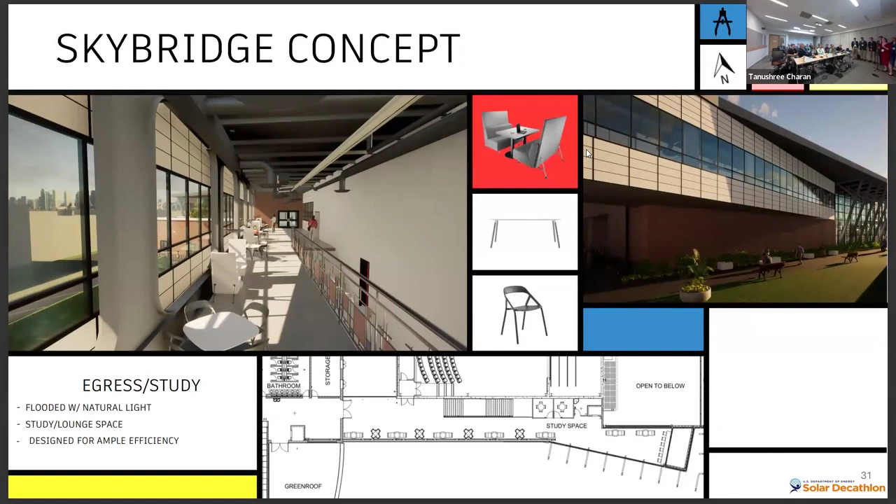Another place that the students would get to utilize is the Sky Bridge. This is what connects the academic wing and the community wing. It acts as a flow as well as a stopper to separate the two. You'll see that it is a long walkway that offers a great flow for getting to and from classes, as well as a seating area for socializing and studying. You'll notice in the floor plan on the bottom, on the right side, there are a couple of quieter study spaces for students to utilize.

So one of the biggest things we wanted to consider is not only harnessing daylight through the solar panels that we have on the roof, but also throughout the space to maximize daylight and wellness. So the first thing that we did is incorporate this product called Kalwall. It's actually a translucent insulated panel that fits right into the curtain wall system. And what this does is it allows 80% of daylight to get through into these large spaces, but it holds an R value of R20, which is going to be way larger than any glazing that we could possibly have. And it's going to really limit the heat transfer through the walls, as we also have those on the skylights as well to minimize the glare.

And then lastly, of course, the solar panels. So we actually have this berm out front that's going to block sound from the train station, as well as create a clear path for the students and give a really close up view of the solar panels. And with our site, this was actually going to get maximum sun throughout the entire year. And then we also tilted some of the roofs, as we said earlier, to really maximize the gain as much as we could.

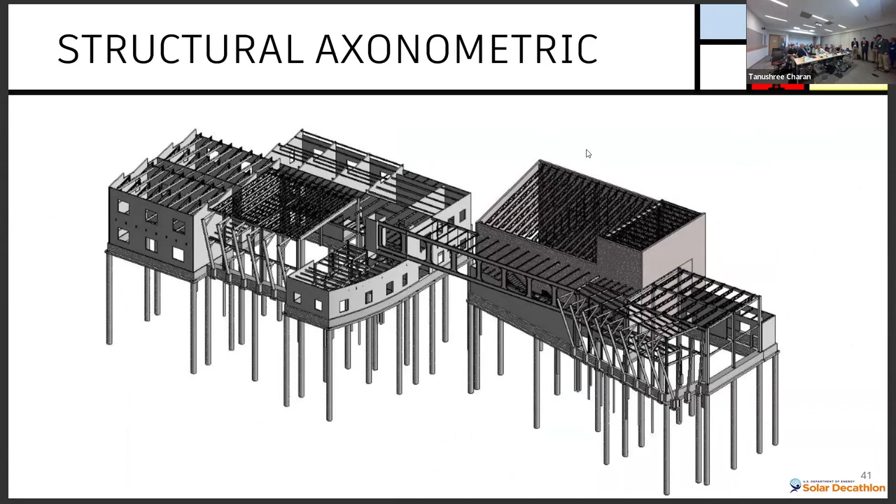Here's an overview of our structural axonometric for the school in the DIY space, with the smaller areas such as the classrooms and the offices using a CMU block wall, while areas such as the auditorium and the cafeteria are using the long span steel structure. The school and the DIY are connected through a bridge with a Vierendeel truss, and we are mainly using recycled steel to help reduce our carbon output.

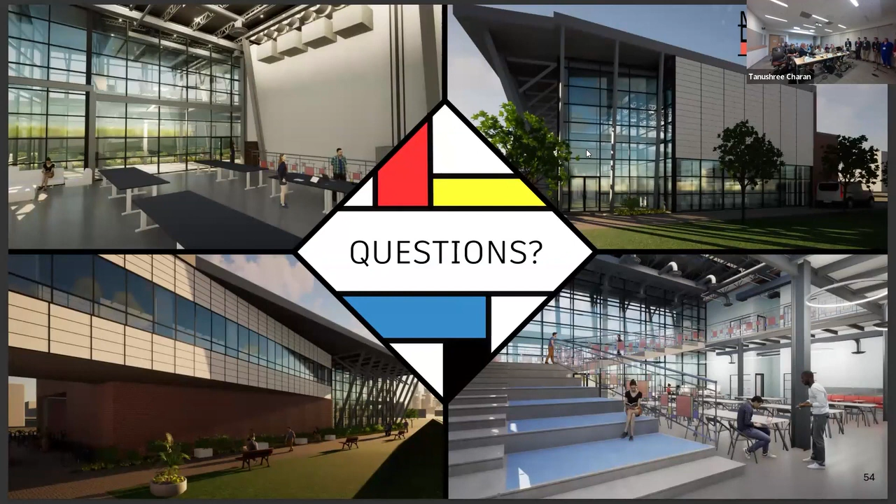My burning question, no pun intended, was for the molten salt: how are you generating molten salt? Number one. And then number two, how long do you think you could store molten salt before it loses its heat? So through investigation, we found that molten salt is a high density, high capacity material that can store it for about 5 to 6 months, if not longer, which is what we need it for.

So basically, any excess solar production is turned into thermal energy that heats up the molten salt. Then, when we need it, cold water gets run next to the tank, gets heated up, turned into steam, which then turns a turbine. You said turned into thermal energy, so like with resistance electric heaters, or how does that happen? It would be something like that, yeah.

Why did you choose the Netherlands? And did you have community engagement and actually speak with people in the area? So our site was assigned by our professor. We are all seniors. This was our capstone project. He chose the Netherlands because he has some family out there that we could talk to, see what their lives are like, how different it was. And that it was an extra challenge compared to what we're all used to here.

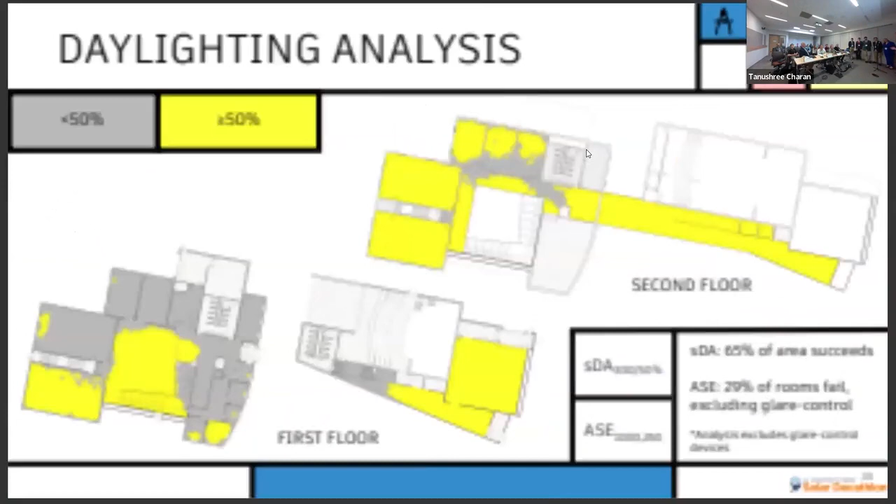Okay, go to your ground source heat pump design in your field. I got this. If you've been sitting in here a while, you know I'm gonna. Go back. You passed it. Oh, no, keep going. That one, yes.

So for the school, for example, there's going to be five rows of wells, and essentially it is going to go into one well, heat or cool, and if it's not enough, it'll go into the next well and just keep going. And the same with the DIY; they're two separate systems, so if all the DIY is closed, we'll have all those heat pumps off. But if the school is occupied, then that field will be running and helping heat and cool the space on the academic side.

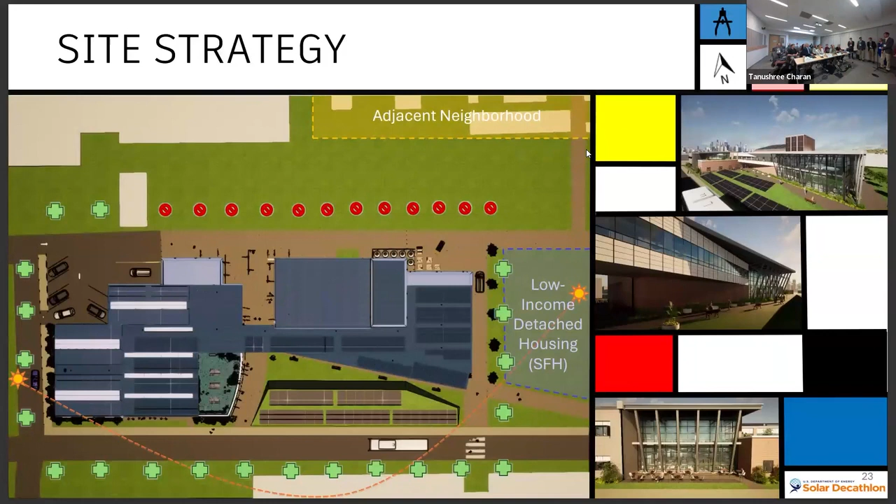So from a plumbing aspect, when I did the plumbing, I designed a male and a female restroom. And then my professor, who knows a lot about that culture, and his family, came to me and said, we don't really have separate restrooms. So basically I just merged the two together, and what you have is stalls that go floor to ceiling. And so that is an aspect of incorporating that into how we would design a project here.

I was actually referring more to performance level. Oh, standards, performance level, okay. Like code. So we design things to US codes because that's what we're familiar with. So the plumbing was the 2018 International Plumbing Code. And ASHRAE standards probably apply anyway, right? And architecturally, code speaking, they are a lot less strict than US code. So designing to US code, we knew that we would meet all of their codes.

Especially in ADA, as you mentioned, they don't really have too many ADA type standards, especially because many of their buildings are so old they don't really have elevators. So that was one of the biggest things we added. Also, between the labs and emergency stairwell, we considered pathways to the stairs and different egress paths. And the auditorium has ADA seating. Yes, there is ADA seating in the auditorium. And flow rates and exhaust rates were also assigned from the international codes.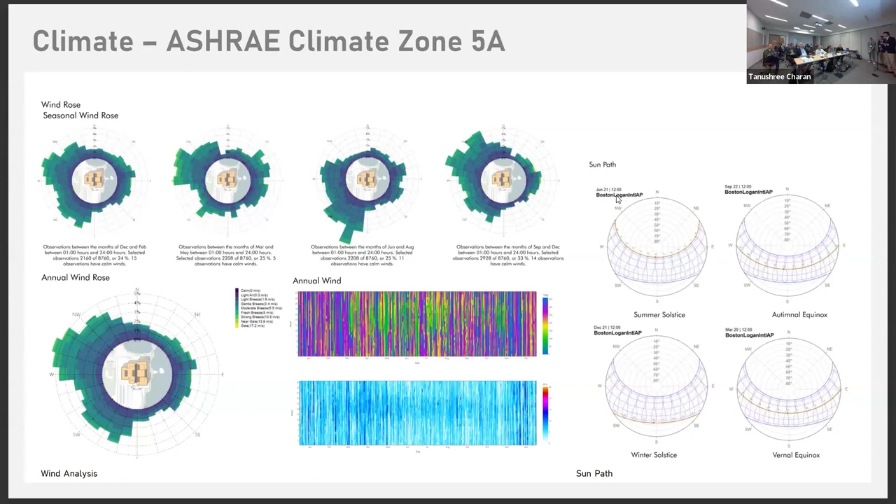While looking at the climate of the site, the wind and solar directions were two of the most prominent design constraints. The south and west directions of the site are unprotected from both wind and direct sunlight, as there are currently no trees on those sides of the building. During our design process, we interviewed current students of the O'Brien School to gather their feedback on their new prospective school location. Their input included the hopes of more natural light, STEM-focused workspaces, community spaces, and more contemporary features.

Our first zone takes on the existing pool and gym and transforms the space into the STEM wing of the school. The central location of the school will contain program necessary for a STEM-focused school such as the O'Brien School.

The central hall is redesigned as a cohesive path of circulation, which ties all 3 zones together. We also added an entry vestibule within the zone to address security concerns within the existing building. The third zone transforms the existing library into a more contemporary library that will offer students spaces to explore their creativity.

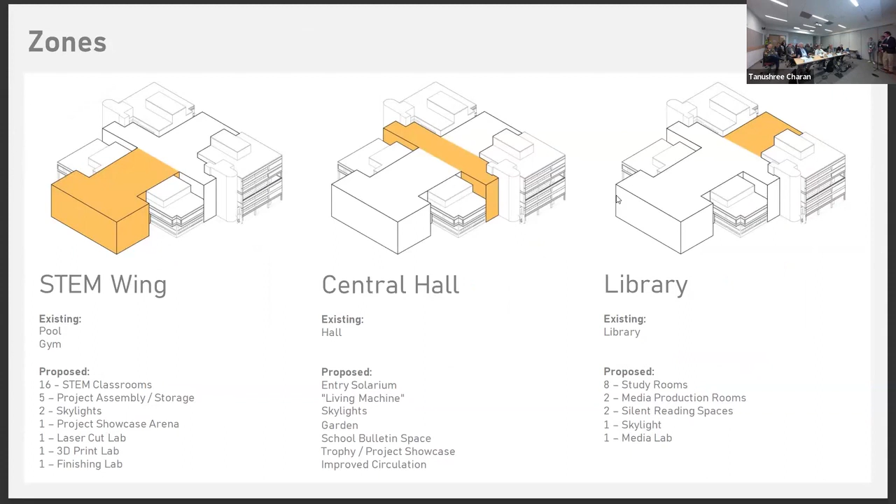Throughout our design, we used frame views, transparency, and natural light as a conceptual idea which allows students to engage with one another between different programmatic relationships. Our organization of the STEM wing was driven by our conceptual values within our design. We chose to organize the grade levels starting with the 9th grade on the top floor and the 12th grade on the bottom floor, where our STEM showcase arena is located.

This creates a sense of progression throughout the grade levels that is fostered by our conceptual ideas of frame views, transparency, and natural light, which connects students together within our zones. The following renders were chosen as they highlight these 3 conceptual approaches and help visualize these interactions through our design.

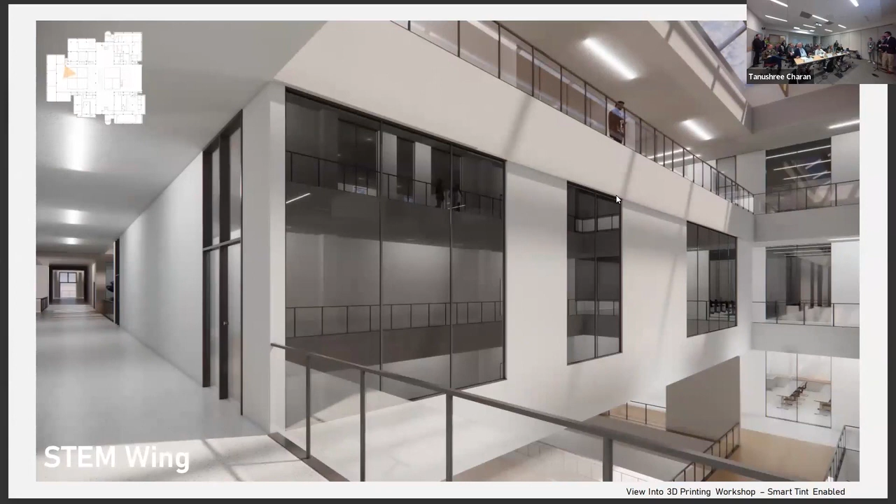Although these ideas can be greatly beneficial in terms of fostering STEM learning, we understand that they may be distracting at times in a classroom setting. To address these concerns, we have used smart glass in all interior glazing conditions. This allows the teacher to flexibly change the level of privacy of their classroom with a click of a button.

The existing building has an EUI of 202. This large number is due to the building containing no insulation and single pane glazing. Our goal is to convert the building to a fully electric system.

We chose to implement 3 glazing conditions throughout our proposal. We are utilizing double paned argon for the addition, vacuum sealed glazing for the adaptation, and Onyx PV glazing for our skylights. The following diagrams depict the existing and proposed exterior wall conditions of the school.

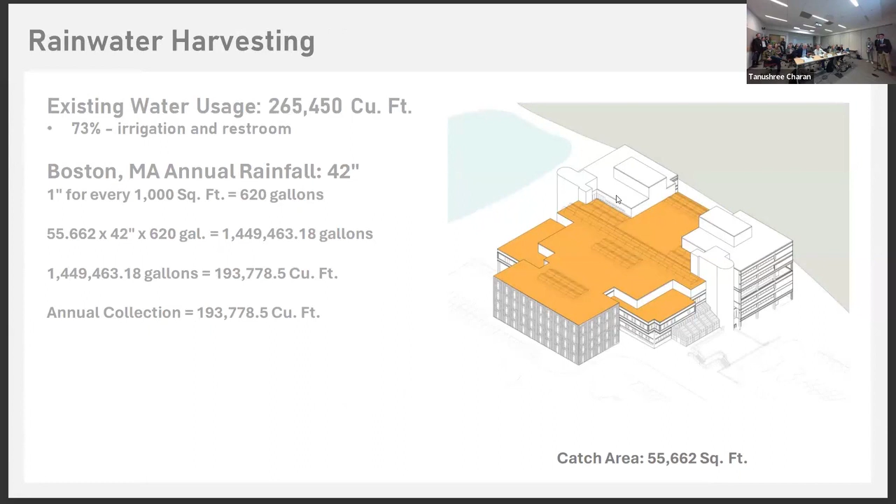The living machine being our functioning ecosystem in which black water will be filtered and is able to be reused by the school.

With these systems in place, our proposed EUI is lowered to 32. This leaves us with the remaining 1.2 million kilowatt hours of energy usage.

The remaining energy will be gathered by PV panels on the roof, which account for 19,000 square feet. The other 4,000 square feet will be placed above parking to the building's southwest.

In addition to these 540-watt panels, we are utilizing Onyx PV glazing in our skylight conditions. This brings our building's proposed EUI down to -0.6 and will have a net return of 1 week's energy gathered by the PV system.

The excess solar energy will be stored in a battery system with the capacity of 1 week's energy usage. This emergency energy is important as the school is used as a community shelter. If that stored energy is not used within a year, excess energy will be returned to the grid.

We developed a functional app that tracks the building's functionality. There is both a student and administrative side of the app, which performs different functions.

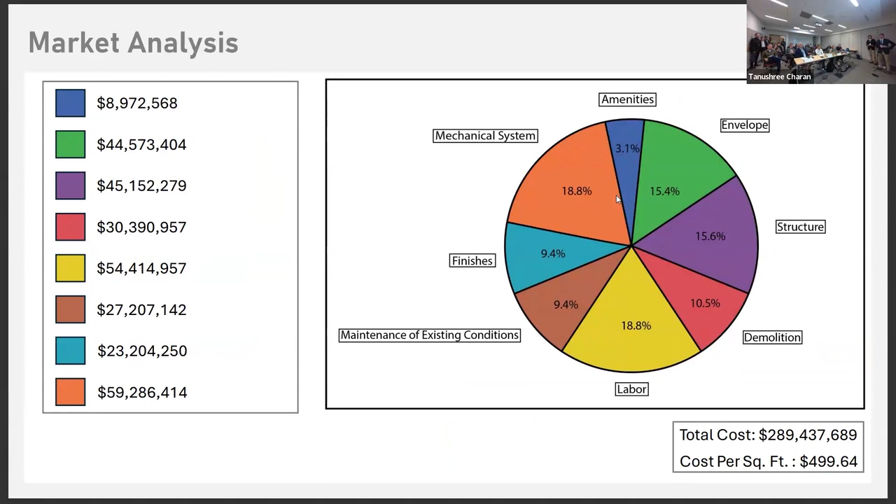And we were able to achieve a total cost of $289 million, which leads us to a cost per square foot of $499.

Can you talk to me about putting the battery on the roof, and whether you checked the structural integrity of that, and the permitting for putting the battery on the roof?

Well, in terms of structure, we're using a proposed hybrid CLT and steel structure. But that would be on the existing roof as well.

Also, the space where we're incorporating the battery is currently used as a mechanical space on the roof, which we're relocating down to the basement level. So that battery system will just replace the mechanical equipment that's currently there.

In your classrooms, are your interior windows operable?

Yeah, that calls back to the window design. There are three portions of the window essentially, and two of those portions, the top and bottom, are operable while the central is fixed. We do that to allow for more airflow, both exterior and interior.

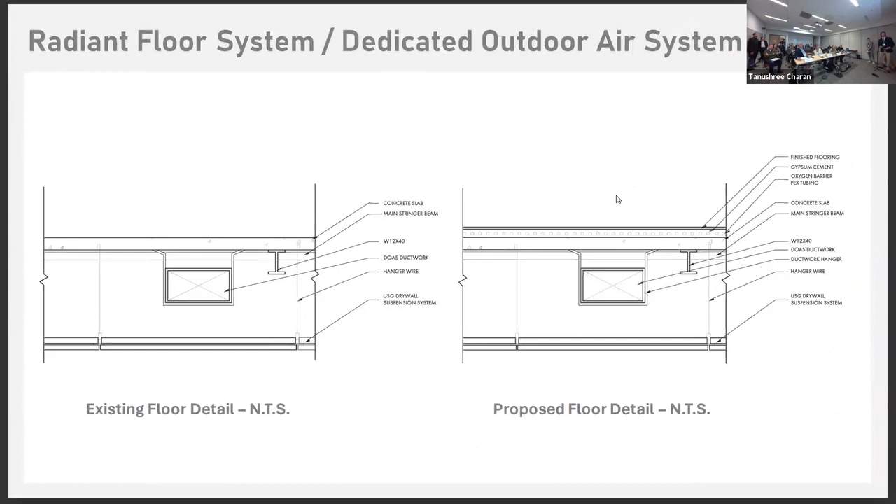Can you talk to me a little bit more about the proposed mechanical systems to heat and cool the school? Yeah, so we chose to incorporate a hydronic radiant floor system that will heat and cool the floor of the building, tied to the ground source heat pump that we use the pond for. And then for a DOAS system, we chose one that would address the humidity concerns that are associated with hydronic cooling.

So in your radiant floor, what is your heat source? Is there a boiler in a mechanical room that heats the water? So it's the ground? The heat pump in the pond, yeah. Okay, I guess I didn't see that inside the narrative. That wasn't in the narrative, but I presume that connects to your radiant system. Yeah, that's right, gotcha.

Let me ask you some questions about that. First, this is in New England, right? Humidity is an issue, right? When you're cooling the floor, did you look at condensation, potential for condensation? We did, and with our chosen dedicated outdoor air system, we wanted to make sure that it would account for dehumidifying the space. So you have an ERV?

Okay, second question is, you chose to use a pond rather than a ground source. And based on your calculations, it looks like this is a heating dominated climate, there's very little cooling, which actually surprised me. So since mostly you're pulling heat out of the source, is the pond the best solution? Because in the winter, when you're trying to pull heat out, I would have thought the pond water is pretty cold to begin with compared to the ground.

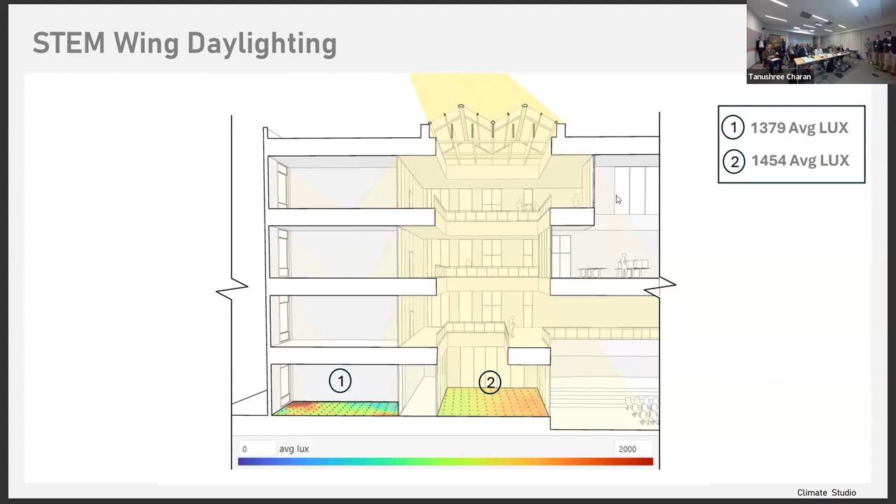If you look at the louvers at the top of the skylight, we have them perpendicular in cases where the skylights reach all 4 floors of the building, to allow for maximum light. Where they only reach 2 floors, we have them tilted at a 45-degree angle for more diffused light. In terms of the organization of the pathways, that decision was made based on the positioning, our conceptual values of being able to look into different spaces, and that idea of progression throughout the floor levels. We can go back here to highlight some of those interactions between the floor levels.

I noticed you mentioned using that atrium as a thermal chimney to ventilate in the summer. Did you consider doing the opposite, using it as a solar collector in the winter? The ventilation at the top of the skylights is operable, so the inverse would be able to happen. Is there any way to transfer the heat down from the atrium into the classrooms? I guess that's something we didn't specifically think of when designing, in terms of bringing the heat all the way down to the bottom. I don't know if it would get hot enough. Possibly.

The vestibule was described as a living machine, is that what you called it? Right. Did you do any analyses to demonstrate the positive or negative impact on building performance of adding this? This addition is on the exterior of the building itself, so it kind of acts as its own building in terms of efficiency. It's more of a greenhouse space, I'd say, for the plants themselves. We did factor it into the energy analysis for the building as a whole.

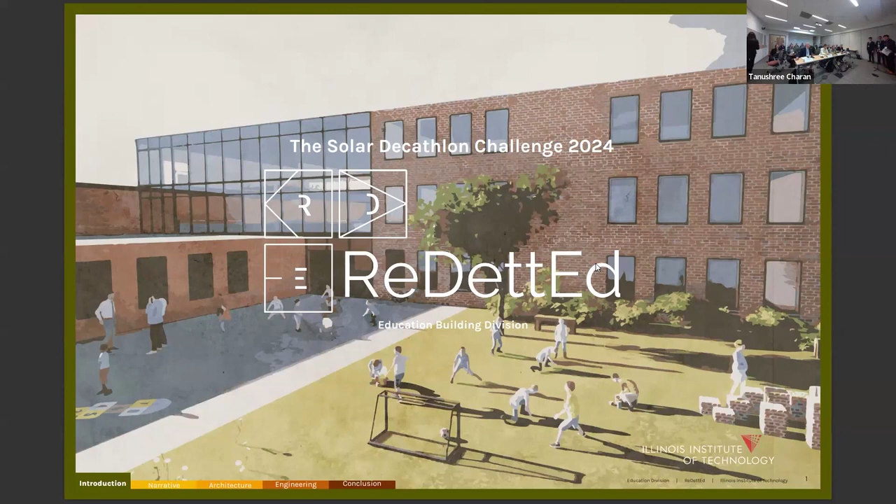The ReDettEd Project, a visionary initiative aimed at repurposing the former Dett Elementary School, is a vibrant educational community hub in the Near West Side of Chicago. This project is not just about architectural innovation. It's about breathing new life into the community while addressing critical social issues.

Dett Elementary, located in Chicago's Near West Side, has stood vacant since its closure in 2013 as part of the largest mass school closure in US history, where 50 schools were closed down. Despite several redevelopment proposals, challenges like community requirements and deed restrictions have left it underutilized until now.

The Near West Side, like much of Chicago, has been grappling with the impacts of the migrant crisis, which began 2 years ago. Since then, more than 40,000 immigrants have arrived in Chicago. Chicago, traditionally a haven for immigrants, is now facing strains of inadequate infrastructure and resources to accommodate this surge. With nearby schools already overburdened, there's a need for resources that address not just basic needs, but also educational and social integration for the immigrant community.

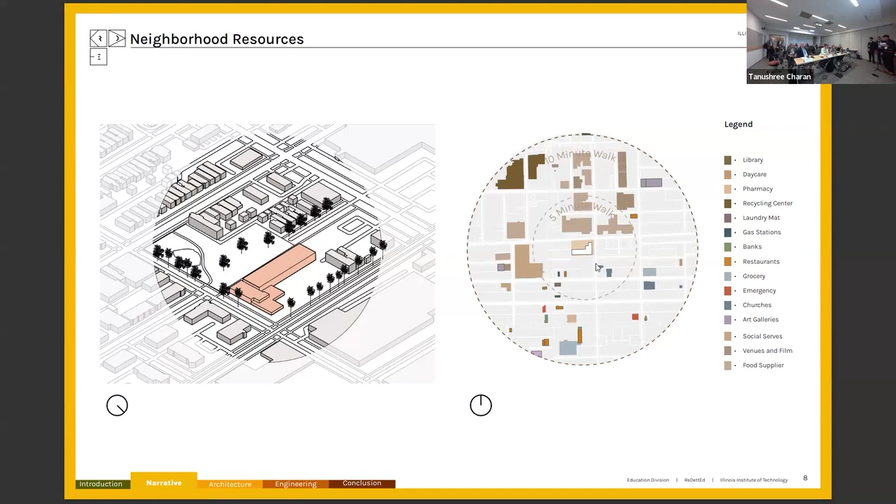The ReDettEd project is built on the principles of sustainability, community integration, and innovation. We aim to transform Dett Elementary into a multifunctional facility that includes educational spaces, job training courses, and social integration services, all designed to empower migrants and foster community connections. The current building falls under zoning area RT4 and climate zone 5A. The EUI stands at 134 kBTU per square foot per year, signifying substantial overall energy consumption.

The main feature of our redesign is the atrium, which serves as a prominent public focal point designed to attract and engage visitors. This feature showcases a variety of activities and underscores its potential to foster meaningful social experiences within the community. The atrium is on our north facade, which faces the main street. That's why we chose to put the main entrance here. In front is the original basketball court, which we kept. However, we did do a few tweaks within the landscaping.

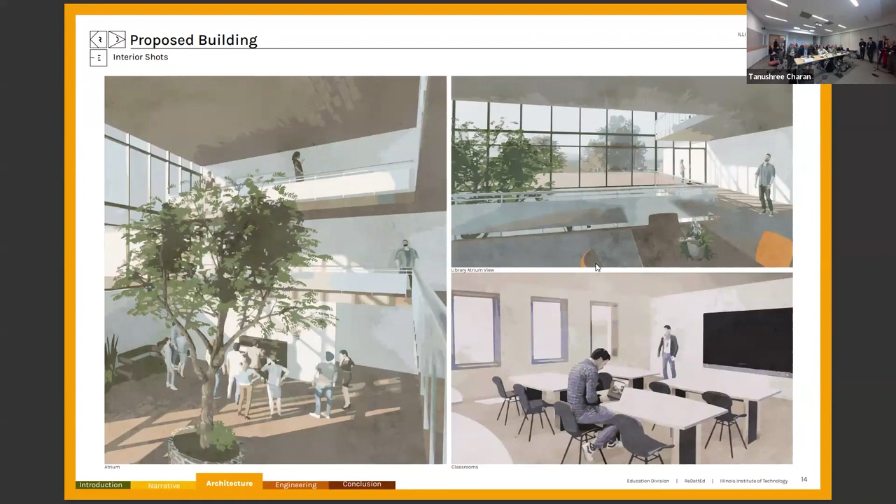So we undertook the necessary demolitions of walls and floors to achieve our objective of interconnected spaces. The longer side of the L-shaped building was mostly preserved since we needed these classroom spaces for classes such as English language proficiency, social integration services, and maybe even job training courses.

On the ground floor is the designated area for public amenities, hosting events such as volunteering programs, legal services, and even fundraising campaigns. On the second floor, we have an open library and gallery that fosters community engagement that will help address some pertinent issues such as the migrant crisis. These also serve as a buffer space in the transition from active to passive programs. The third floor is dedicated to youth-oriented classrooms, and it also includes an indoor play area.